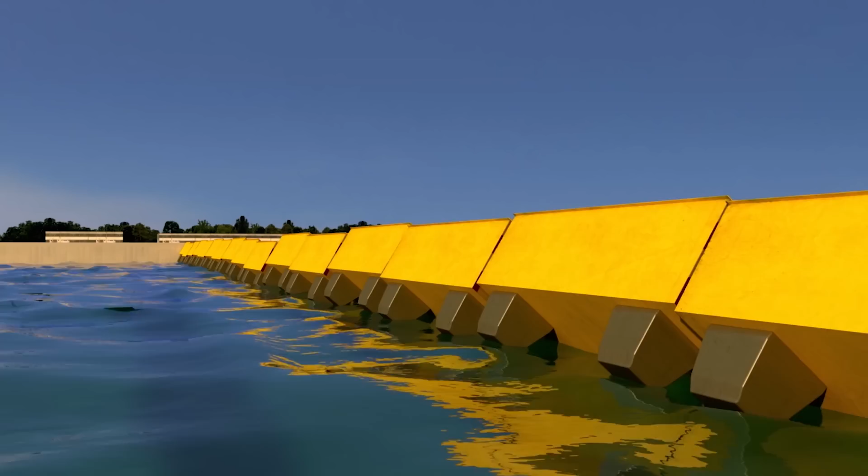For the last 30 years, engineers have planned one of the most ambitious moving dike projects in the world, dogged by indecision and scandal. Today, the MOSE, the mobile seawalls the city never needed in the past, are almost ready to be used.

A new day rises over the Venice lagoon.

The water in the lagoon is between just 4 and 14 meters deep. But when the 550 square kilometers of sea surface are whipped up by adverse winds and tides, the sea level can rise by up to 2 meters, flooding the city that was built on millions of wooden stakes that hold the hundreds of sandbanks and islands together.

The architectural treasure that is Venice is threatened by the very element that made it prosper in the past: water. Its position and wealth have been its ultimate downfall. With a dwindling population, the city is literally being broken down by tourism and climate change. But saving Venice has become a World Heritage priority, and billions are being spent to stop the rot.

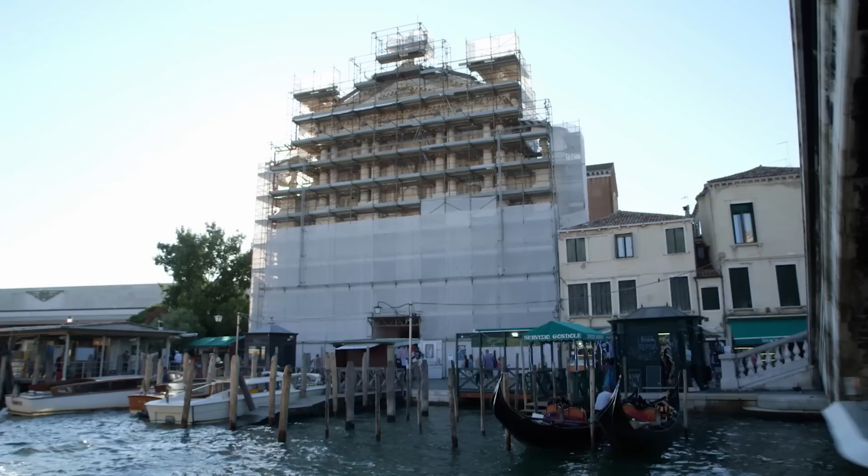The lagoon is an ecosystem in danger. Not only the city, but the hundreds of islands and wetlands that make up this unique landscape risk being lost forever, with the added complication of rising sea levels.

Bounded in the north by the river Sile and in the south by the Brenta, for centuries the Venetians fought a battle to stop the lagoon silting up, even deviating the course of inland rivers. Access to the sea was Venice's source of power, and the lagoon was its natural defense.

In the last 30 years, the situation has been reversed. Trade now goes to Marghera, the city that drained the water table, and the sea has become a threat.

The walls of Venice are the massive floating barriers that will stop the sea from flooding Venice.

Giovanni Zarotti is the lead engineer on the MOSE project. He has seen it grow over the years and now heads up the team that will bring it to fruition.

The new Venice consortium of Venetian enterprises has come together to build the MOSE, or Modulo Sperimentale Elettromeccanico, the floating walls that will defend Venice from high waters.

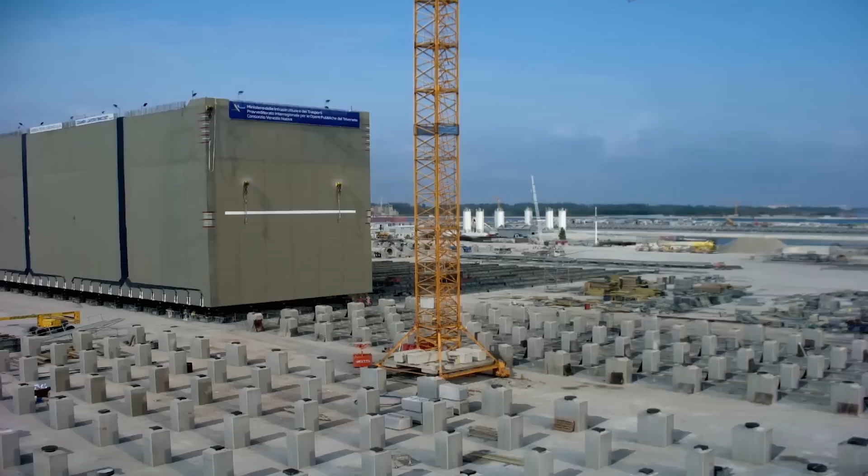Moving the massive engineering parts that make up the MOSE fell to one of the world's leading heavy lift companies, Fagioli. In 2012, the company was engaged by the new Venice consortium to lay the floating barriers and concrete housings that cross the Lido entrance to the lagoon. It was the beginning of the final phase of the MOSE project.

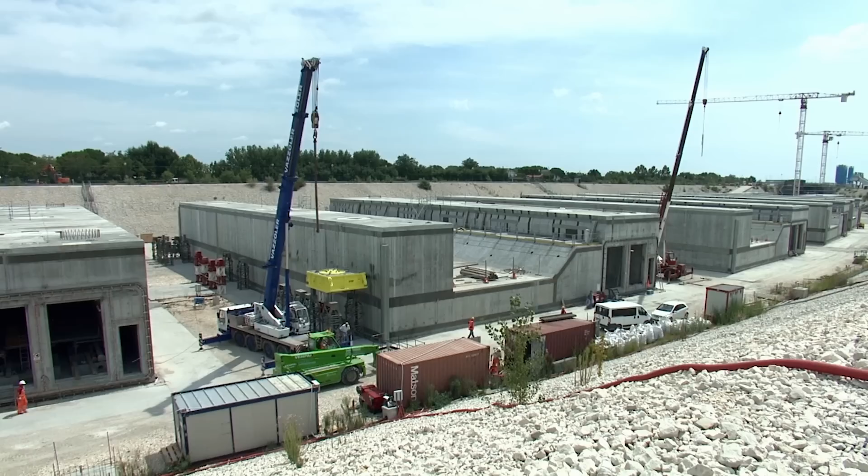However, the Malamocco and Chioggia entrances required extra engineering, as they are even deeper and wider than the Lido entrance. Fagioli's engineer, Tommaso Favaretto, was the lead engineer on the project.

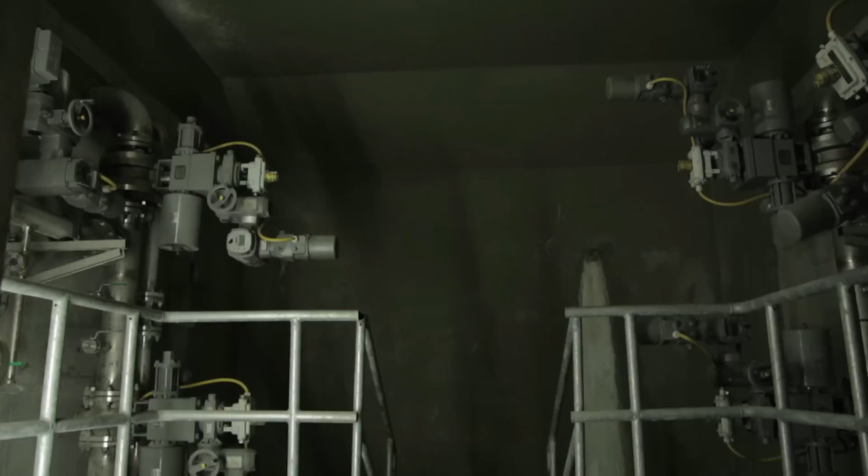The project was officially launched in 2003, and a lot of the work, most of which has already been finished, were works of civil engineering. So, for example, the concrete housings that form the base of the work and the housing for the walls, consolidation work, and the essential infrastructures that the whole project needs, located at the lagoon entrances.

The Venice lagoon is 80% made up of wetlands that are partially submerged, and only 12% is made up of islands, while the city of Venice is actually held together by millions of wooden piles pushed into the mud and sand.

The tides that so threaten the city are also its only real drainage system. Twice a day, clean water enters the canals and dirty water is taken away. As a result, there were several prerequisites for the MOSE that the designers undertook to respect, not only to maintain the overall visual aspect of the lagoon, but also to ensure free exchange of water between it and the open sea.

Access for ships and seawater into the Venice lagoon is through 3 openings in the long sandbank that makes up the barrier with the open sea. The openings are at the Lido of Venice, at the small fishing village of Malamocco, and in the south of the lagoon at Chioggia.

The MOSE concept is based on a system of floating barriers to close these 3 openings when adverse wind and sea conditions are forecast. They are massive steel walls that can be filled with compressed air when necessary, rising to the surface, making a floating wall.

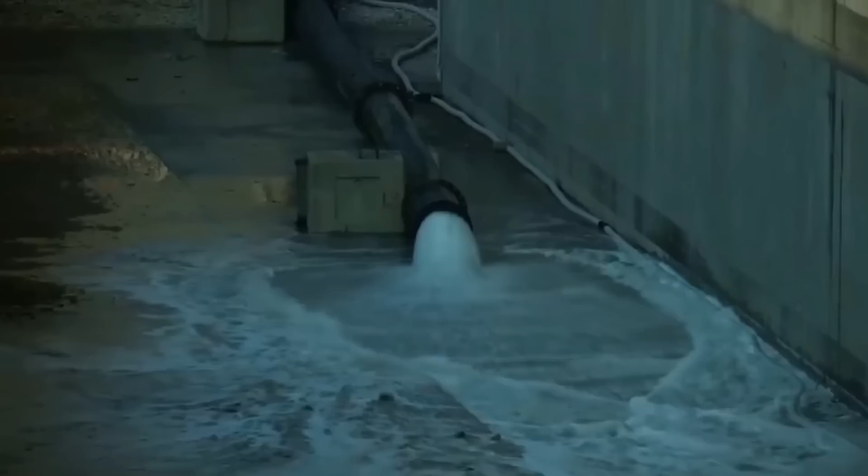In these extraordinary images, dating back to the first campaign to lay the caissons, the concrete housings for the barriers, we see the area where the housings were built being flooded. One by one, the caissons were pumped with air and floated.

Fagioli used a special catamaran to position each 12,000-ton concrete housing over the 12-meter deep trench dug into the sea floor, where 4 300-ton capacity strand jacks lowered it onto bags that were slowly emptied to provide the soft landing needed for absolute precision.

The exact location of each caisson was guaranteed using GPS positioning and radar. It was one of the most complex moves Fagioli had ever carried out.

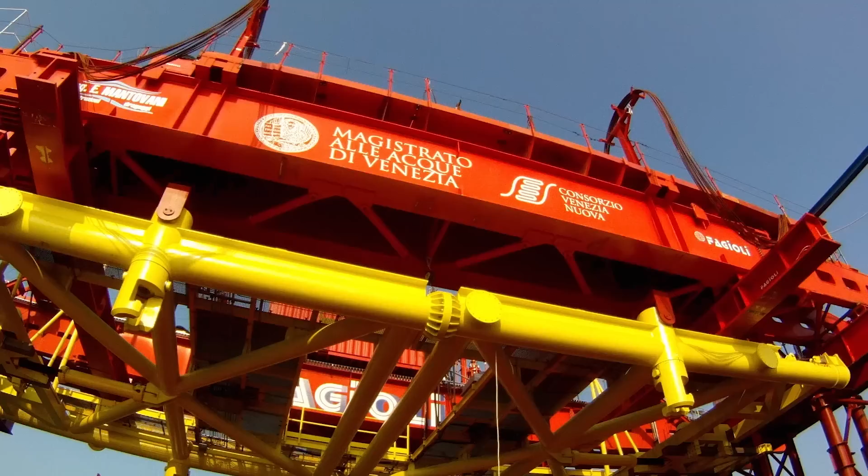Then the walls themselves were laid. They weighed 210 tons. They were floated out to the location above their concrete housings on a barge, and then lifted by a specially designed gantry crane and lowered into place so that they fit perfectly onto the hinges.

In a rare visit to the underwater bunkers, located more than a dozen meters under the surface of the lagoon, the actual configuration of the concrete housings for the mobile barriers can be seen. A tunnel with lifts at each end allows for regular inspection of the hydraulics and electric systems that are at the heart of the MOSE.

Each hinge is housed in its own room with watertight access doors. A reserve tunnel ensures there is access under all conditions, even when the bunker-like construction is flooded.

Malamocco is a pleasant fishing village on the strand that separates the Adriatic Sea from the Venice lagoon, and is also the place where hundreds of ships pass through every year to get to Porto Marghera, the great industrial and petrochemical hub of northern Italy.

The channel is particularly deep, and the caissons, or bunkers, were built close by as they were particularly heavy. While at Lido, each of the caissons is able to house 2 barriers, here each concrete underwater bunker houses 3.

At Malamocco, the system used was different, although the housings were essentially the same. They were built on a bank above sea level and then moved via a system of rollers and taken to the synchrolift, a kind of massive elevator that lowered them into the sea, and then they were floated away and tugged to their final destination, and then sunk again.

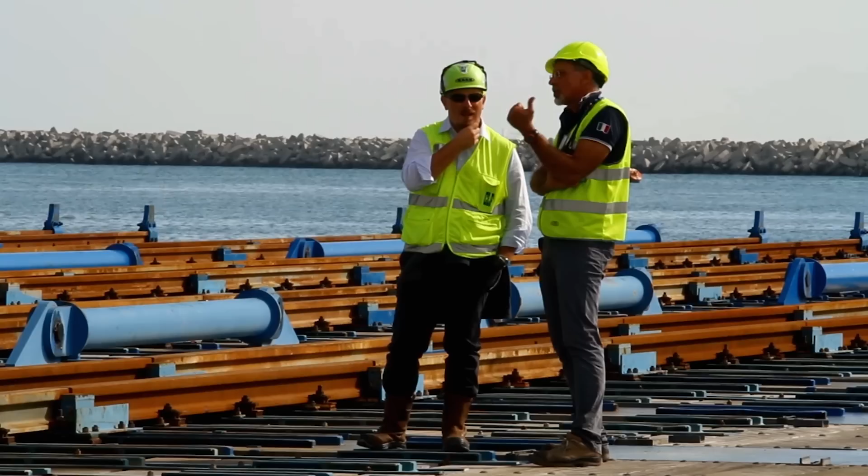Building such a huge work of civil engineering was easier said than done. The concrete structures built at Malamocco first had to be lifted and then moved onto the huge synchrolift crane.

Then they were lowered into the water to be tugged out to the open sea and dragged to the place where they were to be sunk. The sea floor had to be specially prepared to house them, so that their roofs were flush with the natural depth of the sea in those locations. Then they had to be emptied to allow access for workers to prepare the electrical wiring and compressed air pipes that activate the enormous floating walls.

The size of the housings varies from one lagoon entry to another, but the largest are 60 meters long, 40 meters wide, and 12 meters high, and the whole of the height has been encased level with the seafloor. Weights differ too, but we are in the area of 22,000 tons of concrete.

The barriers have a very important element, the hinge that allows them to rotate and also receive all the surface piping that carries air, making them rotate and float. So there are corridors that allow workers to run through the housings.

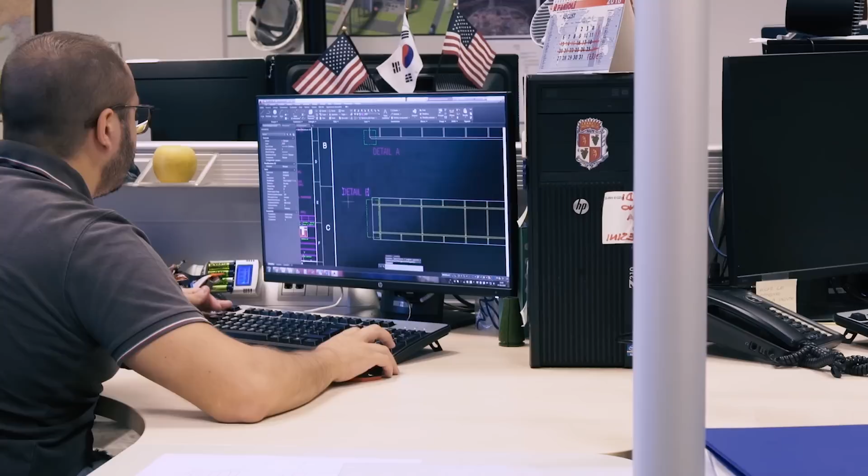Here at the Fagioli headquarters near Reggio Emilia in northern Italy, engineers are working on the technical specifications of a gantry crane that is soon to be handed over to the New Venice Consortium to allow the regular maintenance of the floating barriers that have become Venice's new walls.

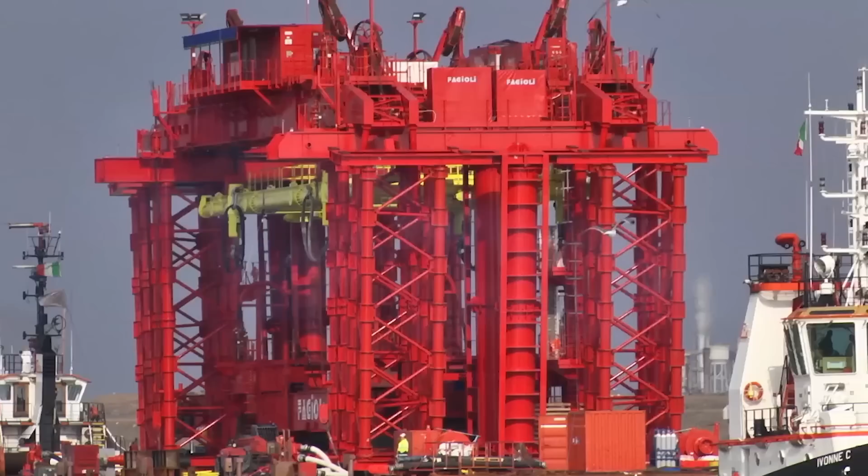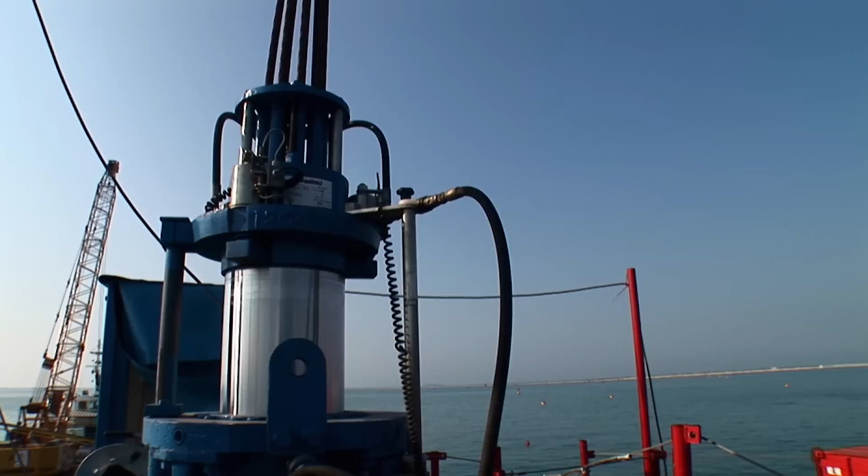A strand jack is a hollow hydraulic cylinder with a set of steel cables, the strands, passing through the open center, each one passing through 2 clamps, one mounted to either end of the cylinder. The jack operates like a caterpillar's walk, climbing or descending along the strands by releasing the clamp at one end, expanding the cylinder, clamping there, releasing the trailing end, contracting and clamping the trailing end before starting over again. The real significance of this device lies in its facility for precision control.

When many strand jacks are activated at the same time under the control of a central computer system, the lifting power of each individual steel strand can be multiplied infinitely. Fagioli famously supplied the near 100 strand jacks that rolled the Costa Concordia onto the artificial sea floor so that it could be readied for refloat.

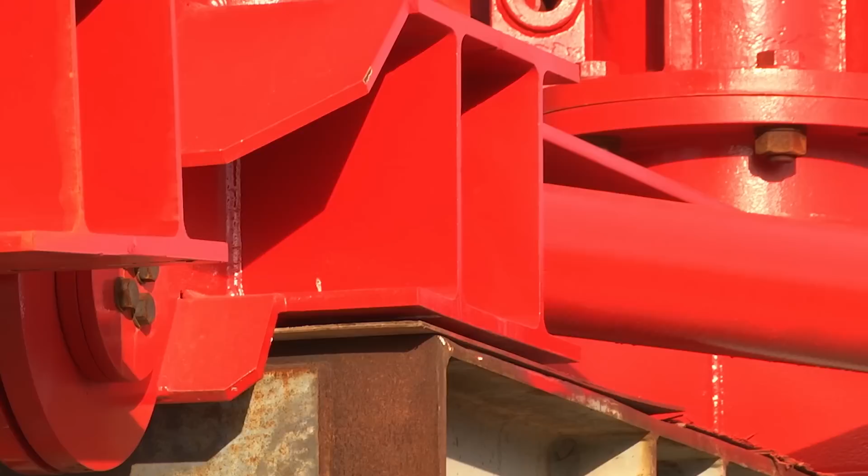The logistics of getting the gantry crane to Venice were so difficult that the company decided to build it directly close by. All the parts were manufactured and delivered to a construction site at Porto Marghera.

The gantry crane is assembled and built at a site near the place of operation, but not on it. The place was ex-Area Pagnan.

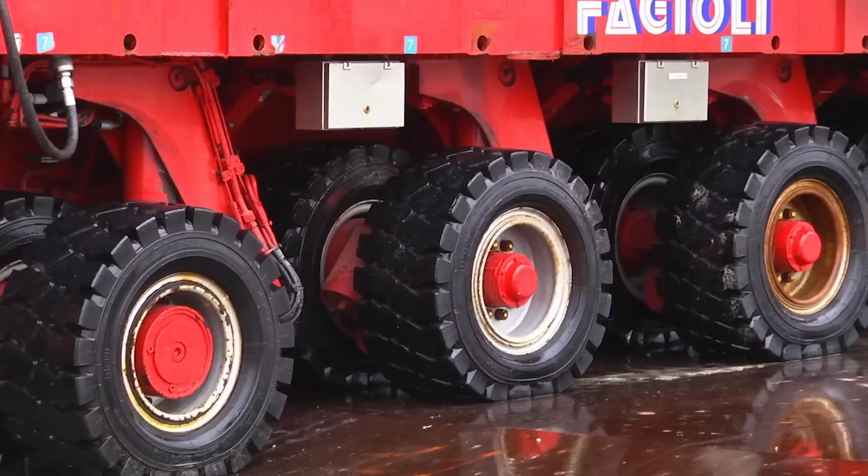Getting the gantry crane onto the barge was a specially difficult task. Luckily, Fagioli also owns hundreds of SPMTs, self-propelled modular transporters, that not only are modular, so can be as long or as short as needed, but can also lift their loads.

Fagioli uses SPMTs in all their heavy lift operations. SPMTs are modular, wheeled flatbed vehicles that are remotely driven and maneuvered. They are able to move in any direction and even rotate, as each set of wheels is independent. They can be as long or as short as the user wants, as well as hydraulically raising their load.

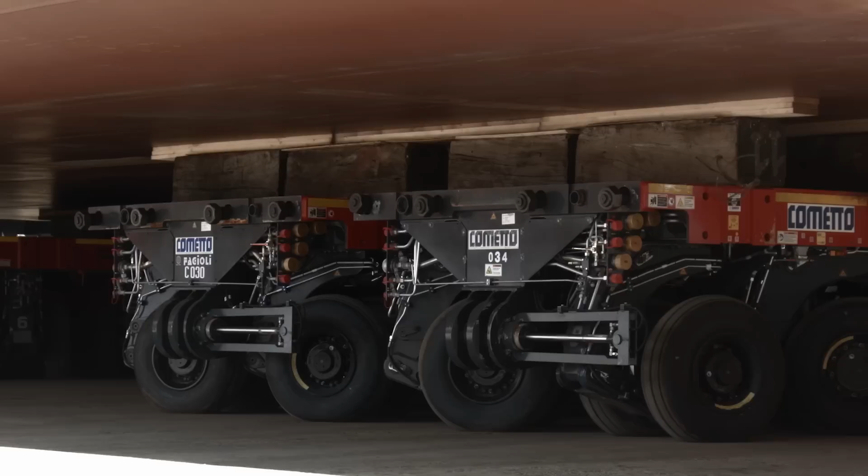They are seen here moving the whole center section of a ship that has been lengthened by slipping this new segment into the middle. The versatility of the SPMTs is shown by how the wheels swivel 90 degrees to move the load perpendicularly to the original direction of transport.

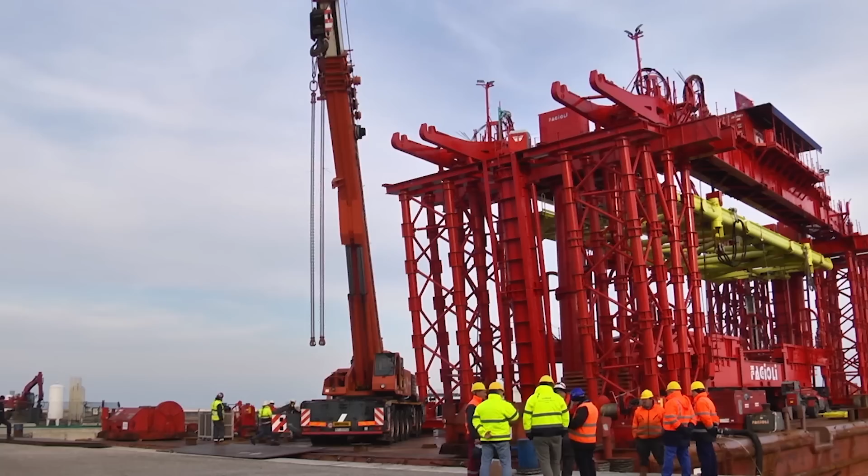Once we reached the worksite, the crane was disembarked and turned 90 degrees into the installation position. Then it was re-embarked in the installation position and then taken to the point above the concrete housing where the first barrier, or the barrier in question, was to be lowered and then set up.

The barge made its way to the pre-established site over the caisson hinge where the floating barrier was to be placed. It was then held in place by cables attached to posts, and the barge pilot's job was now to keep it stably in the same place, using a joystick that pulled on the cables to counter any current or wind.

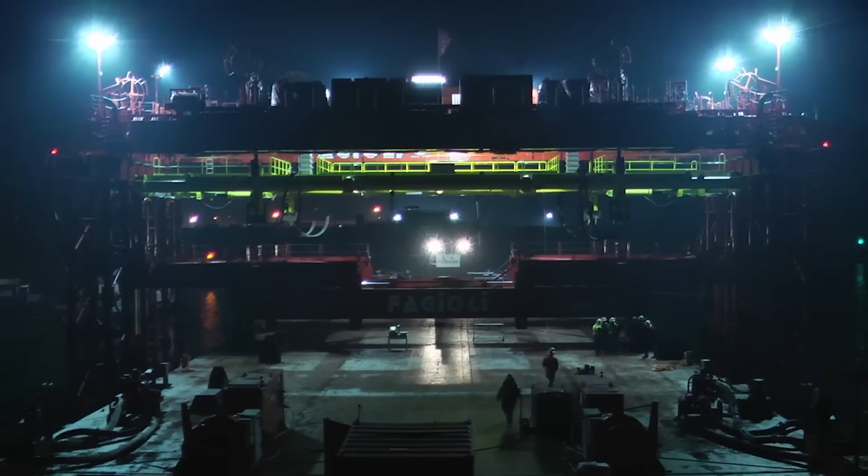The strand jacks pulled open the legs, which were then locked to provide maximum stability. The lifting device lowered the gantry crane onto the surface of the caisson.

The gantry crane was equipped with a centering cone located in the base of the frame, which is a male part that's wedged into the receptacle on the surface of the concrete housing. Once in position, the gantry crane is lowered until the male cone, on the foot of the crane, enters into the receiving cone located on the housing surface.

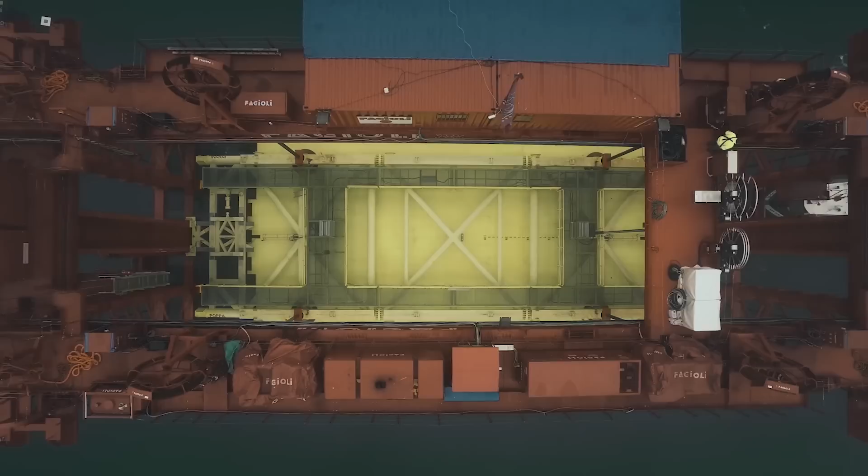So the barrier is attached to the fishing beam that's attached to the gantry crane via strand jacks that allow vertical movement. The fishing beam is equipped with hydraulic systems that push against the gantry crane to allow for horizontal movement, so we get millimetric positioning both vertically and horizontally.

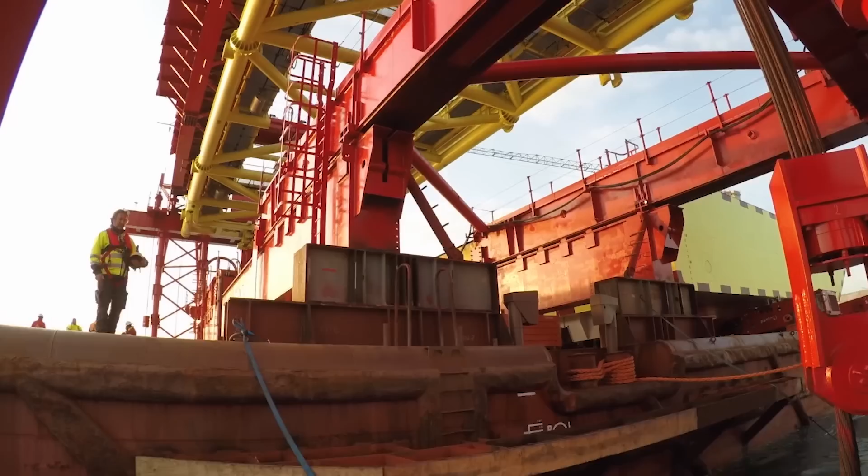However, the whole operation involved laying floating barriers in as little time as possible. So as soon as the first was fixed in place, the transportation beam was brought out on the barge, and once again the gantry crane was lifted out of the water. The strand jacks pulled up the legs, and once again the barge was tugged to the next position.

Laying the MOSE floating barriers took months, in every kind of weather that the Venice lagoon could throw at the equipment and the men.

In all, there are 78 barriers, but more were actually built because there are 2 spare barriers for every lagoon entry. The reason for this is that these barriers will have a periodic need for maintenance. So, in order not to leave the place where the barrier has been removed without protection while it is being repaired, the extra and identical barrier is positioned there as soon as the barrier due for maintenance is removed.

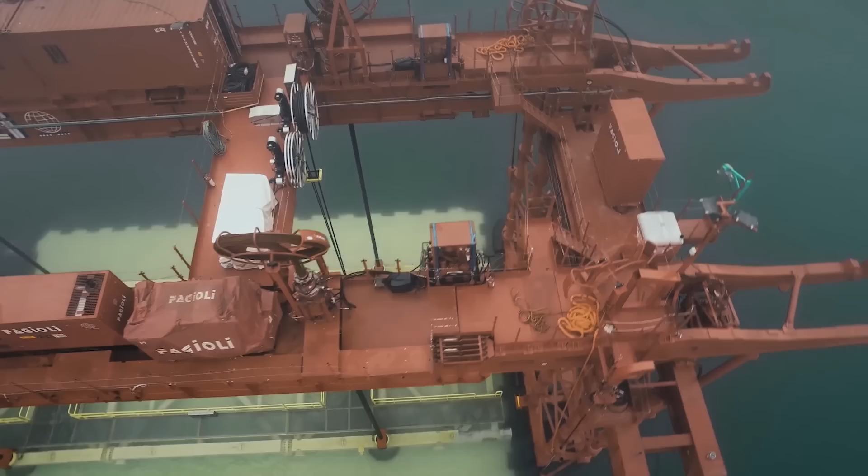As the seasons came and went, the floating barriers of Chioggia and Malamocco were securely laid, and the great civil engineering project approached completion. The next steps involved testing it.

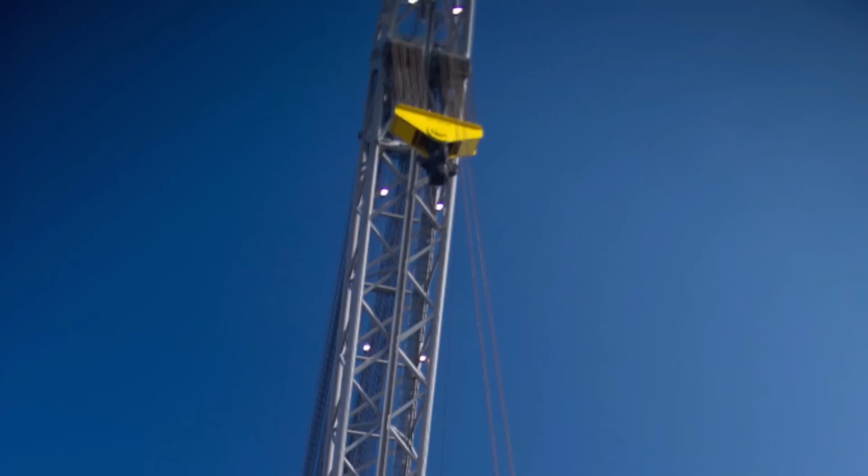A giant of the sea roams the ocean, a huge ship with a massive crane. This is the Oleg Strashnov, one of the biggest monohull crane ships in the world. Its mighty boom is able to lift up 5,000 tons of weight. It is not only a huge crane, but also an efficient multitasker, integrated into a ship system that stays stable in the water, whatever the weight, whatever the elevation. This is a true marine monster, a legend of the sea.

The sun rises over the Dutch port of Schiedam, located on the busiest waterway of the country, west of Rotterdam and close to the open North Sea. This is where a hub of nautical companies provides the most advanced engineering support for the whole of the maritime industry.

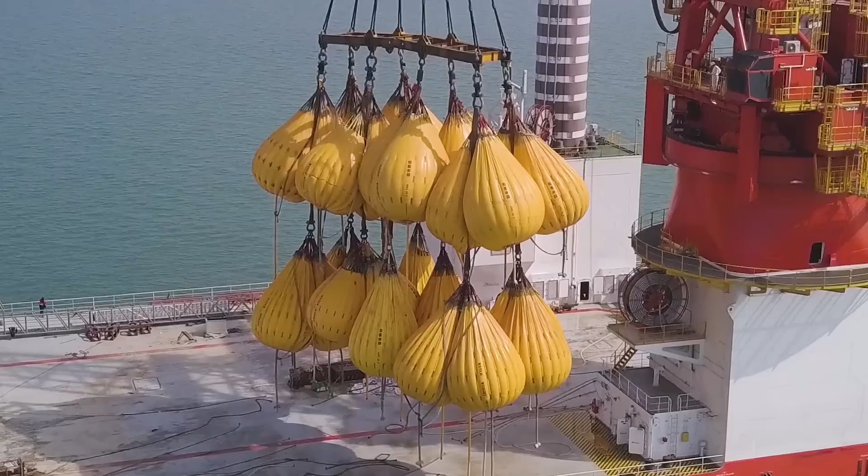The name of Gusto MSC is intimately tied to the world of shipborne cranes, machines that have played a fundamental role in the offshore energy industry for decades - little-known machines that have been strategic for the growth of first the oil and then the wind farm businesses.

Gusto MSC's clients are companies that, amongst other things, require heavy lift capacity offshore. The cranes that the company has designed are integrated into ships, jackups, and rigs that not only navigate the seas but also have the necessary stability to withstand environmental forces and perform their heavy lifting tasks.

Arjo van Putten is the chief engineer of the crane department at Gusto MSC. He has honed his skills designing massive cranes of all types, including the huge 5,000-ton crane of the Oleg Strashnov installation ship. Lifting capacity is one of the most important things.

And the outreach - in fact the combination. So for example, if it is 5,000 tons at 30 meters or 40 meters, that's really a big difference. Once we know that, then it is important also to know the lifting height. Especially nowadays for wind turbine installation cranes, the required lifting height increases quite a lot.

So that's also an important factor, and it can have an impact on the complete design of what we are going to use. Alain Vassink is the marine architect who designed the Oleg Strashnov and is now sales director for the Gusto MSC cranes. Gusto MSC is a design and engineering firm, and we specialize in design of mobile offshore units of all sorts and types, from jackups to semis to ships.

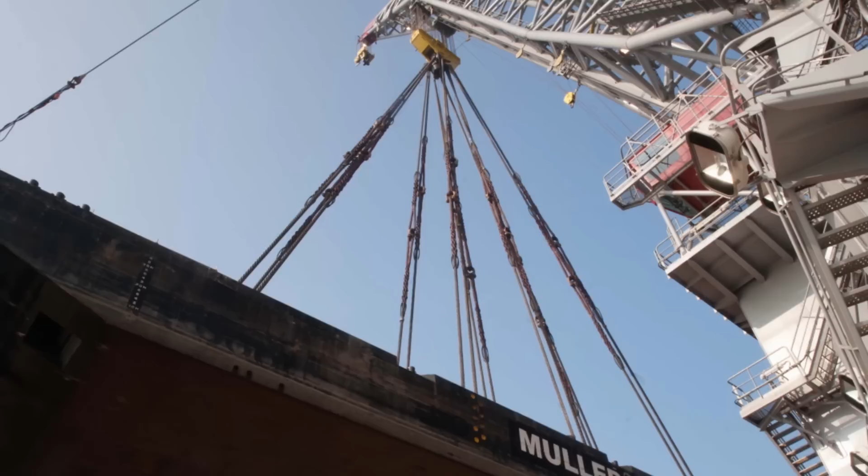The massive crane that Alain and Arjo have built is the result of 7 years of hard work, first designing and then building and testing the ship and crane. It was in the spring of 2007 that we got the order for the delivery of the crane.

Then we spent about a year on the whole design. And then of course already we start purchasing materials because there are some long lead items. Especially at that time the market was booming, so delivery times increased quite fast. So we ordered all the long lead items as soon as possible.

Then the eventual delivery was almost 4 years after the original order. We started out in 2005 with the owner, Seaway Heavy Lifting, to come up with a concept for a fast crane vessel. Most vessels are quite slow, 4 to 6 knots at that time. This was a fast crane vessel, versatile, with the then highest lifting capacity for a monohull in the world. They wanted a design that could sail fast and be very stable when doing lifting operations, which is usually a contradiction. Gusto MSC actually builds the cranes itself, ordering the parts from outside, while the company provides ship designs to third parties who construct the ship.

The two key elements of the integrated ship and crane system grew by the day until the ship was ready for launch. It was the 22nd of August, 2009. I've been involved since the inception of the ship. Seeing it enter the water was quite an exciting moment. For me as a naval architect, that's the birth of the ship.

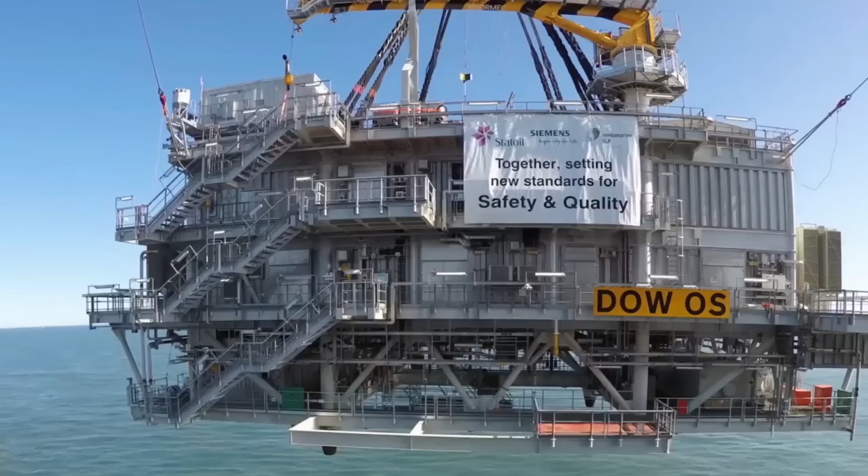Oleg Strashnov is one of the largest monohull crane ships in the world, and the original owners had some specific and very ambitious requirements for the ship. Indeed, it was and remains a revolutionary ship in many ways. It is one of the fastest of its class. It has one of the largest cranes, and above all, it offers an amazing amount of versatility. It is truly a marine monster to be respected.

So the ship came out at a little over 180 meters in length, with two beams, of course. We have 37.8 meters on the low draft, and we've got 47 meters on the deep draft. To make this happen, you need quite a high ship, because you have to still have some freeboard when you're in your deep draft. So you're at around 18.2 meters in depth of the hull, with ultimately a displacement of around 70,000 tons at the deep draft.

The marine architects of Gusto MSC accepted the challenge to design a ship that was highly unconventional, but also highly competitive in terms of speed and fuel consumption. The design criteria for the Oleg Strashnov included the ability to work on site, while the ship also provided a stable base for the massive crane with its unique revolving main hook with a 5,000-ton lifting capacity. Designing such a ship, maintaining balance when the crane arm is fully extended, was a challenge.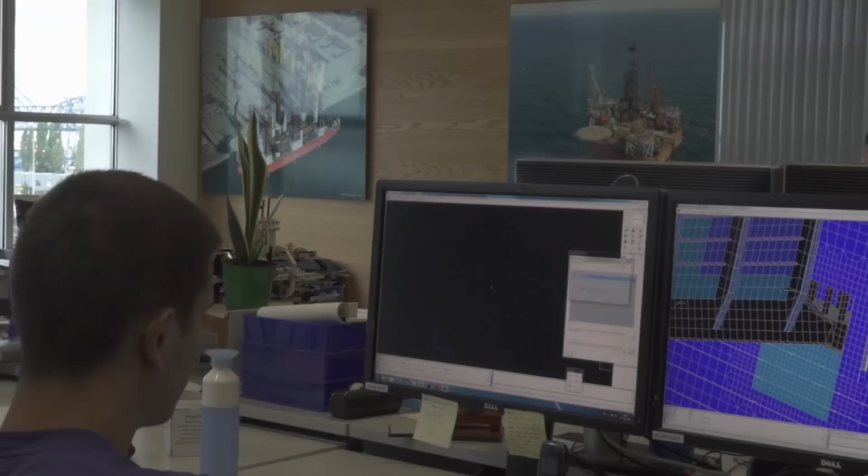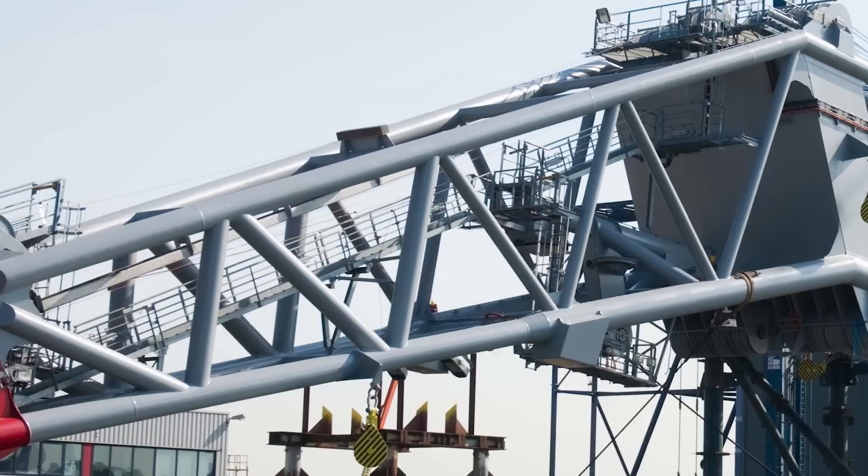The boom chords, for example, the big tubes, are made from 690 material, that's steel with a strength of 690 megapascal. Other parts like in the A-frame, the backside, mostly parts in tension, are made out of the 690 yield material. But the braces, which are welded, the tubes in between the big chords, are made of 355 yield material, because they are not governed by the stress in the material, but by vortex shedding.

However, most of the crane's work is done with small loads, and this is where the supplementary lifting machines come into play.

A special thing about this crane is that normally when the crane is rotating with an empty hook, with the boom at about 60 degrees angle, the center of gravity is exactly in the middle. That was one of the design criteria. There is a removable ballast system at the backside of the crane, and by doing this, most of the operations are actually small loads. So the lifting capacity is 5,000 tons, but more than 90% of the lifts are less than 100 tons. During all those operations, the boom is at approximately 60 degrees, and it can rotate without having to ballast, because the center of gravity is in the slewing center.

The industry sets standards, but these cranes are so huge that extra safety measures have to be introduced to make sure nothing, absolutely nothing, goes wrong.

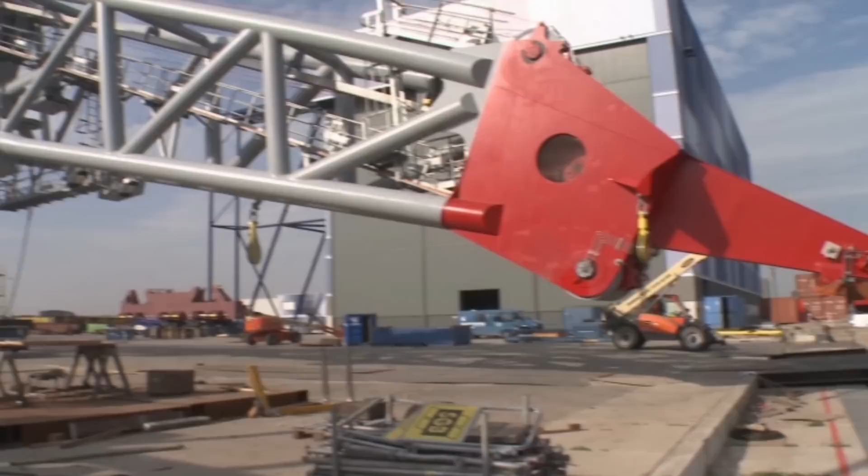There are several main component parts of a crane: the boom, the long arm that extends out to sea to lift heavy loads, and of course the A-frame that controls the extension of the boom, lifting and lowering it as necessary, and through which the lifting cables pass.

There is also the ring platform around which the crane swivels, and the motor that provides the power both for moving the crane and turning the winches that pull the loads up or down. On Oleg Strashnov, all these components are massive.

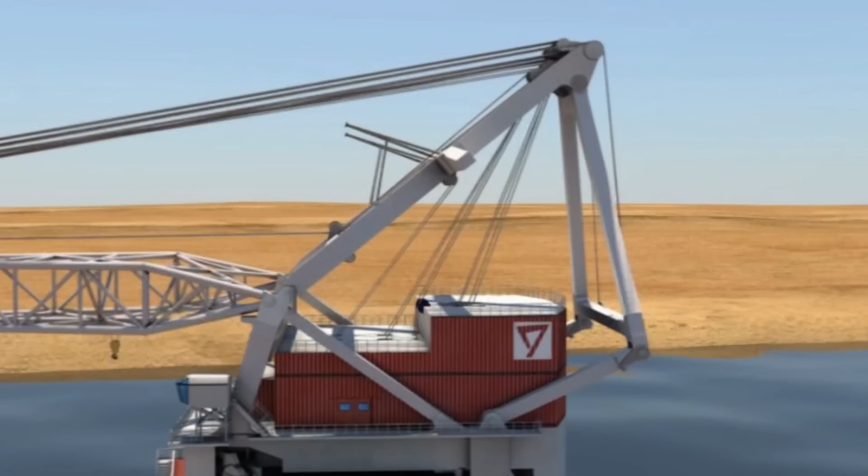Oleg Strashnov's A-frame is also special, as the client required the ship to pass under the world's bridges, such as the Bosphorus Bridge that joins Europe with Asia, so as to engage in offshore heavy lift in the Black Sea, one of the world's most strategic areas for energy resources.

We added an extra hinge at the aft side of the A-frame, at the back leg, which is a vertical leg. Normally that leg is in tension, but during transit of the vessel there can be a vertical load downwards as well, and then it's in compression. What we did is we created an extra hinge, which is normally locked by a small beam.

When we want to lower it, first the boom is lowered into the boom rest, and if we keep on rotating with the boom hoist winch, then the rope tension is lowered, and eventually the A-frame should go backwards, but you have to help it a bit. So what we did is there is a locking system, and when you unlock it, there is a hydraulic cylinder, and it gives us what we say a kick in the knee, so it starts to bend, and then on its own weight, it has to go backward.

Once these major design features were established and construction completed, the actual assembly of the massive crane began. This in itself was a mega-lift operation.

The motor housing was built in China and delivered to the Schiedam docks, where it was to be integrated with the ship. Here it was lifted onto a massive barge and lifted by two shear legs to be transported to Oleg Strashnov.

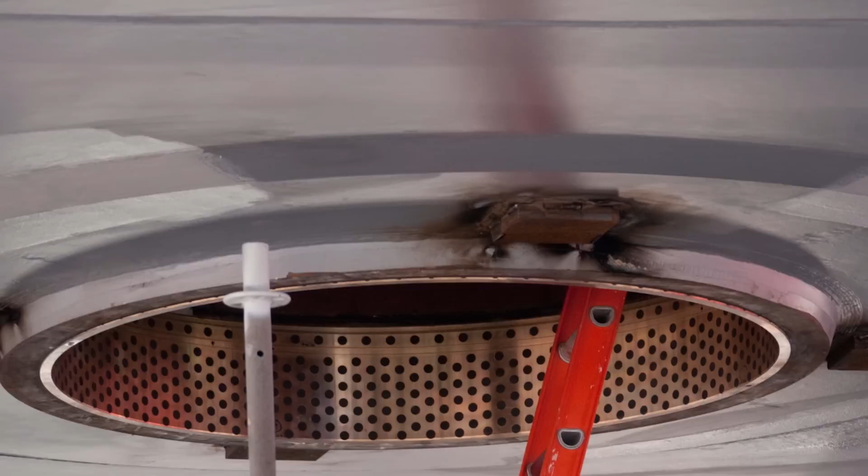The motor housing had to be positioned with millimetric precision, and only the expert eyes of the designers and construction workers could guide it properly into place. It was placed delicately on the base and the pin.

The bogies followed and were fitted perfectly on the rails, allowing smooth rotation of the crane.

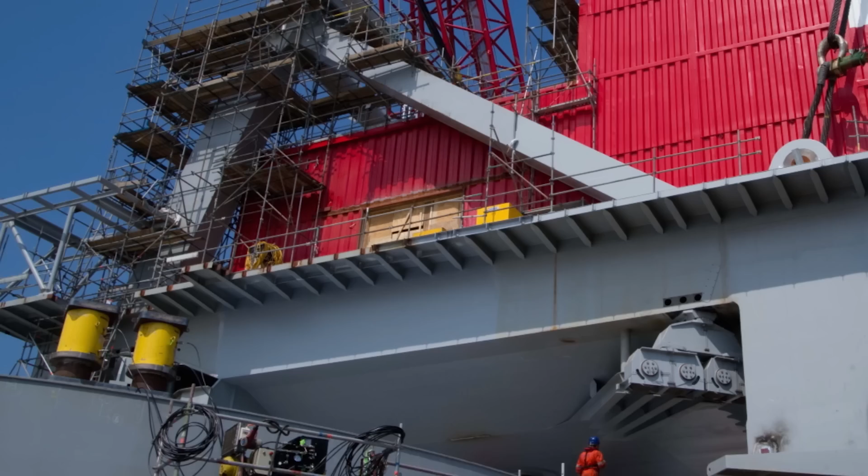Then the A-frame had to be fitted. Not only the static part had to be precisely connected with the crane base, but the folding segment had to be lowered so that the massive pins that allowed it to be collapsed to reduce height could be inserted accurately. This in itself was a mammoth task, and yet there was much work still to be done.

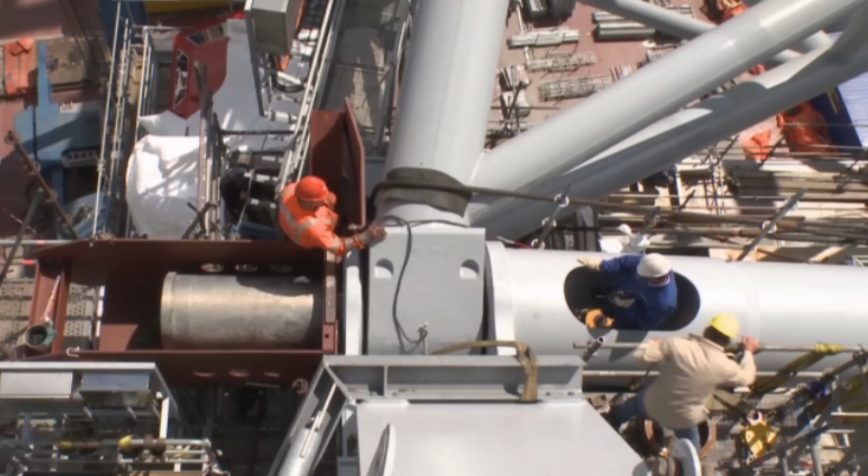The largest single element of the crane was now ready to be moved. The heavy lift company, Sarens of Rotterdam, moved the boom onto a barge using self-propelled modular transporters, or SPMTs, from which a massive shear leg was able to lift the 100-meter-long steel trellis structure onto the huge hinges that awaited it on the crane body. This was the crucial moment of the assembly of the whole Oleg Strashnov crane ship.

This was followed by lifting the ballast for the crane, the counterweights that are brought into play every time the boom lifts a weight at the fullest extension.

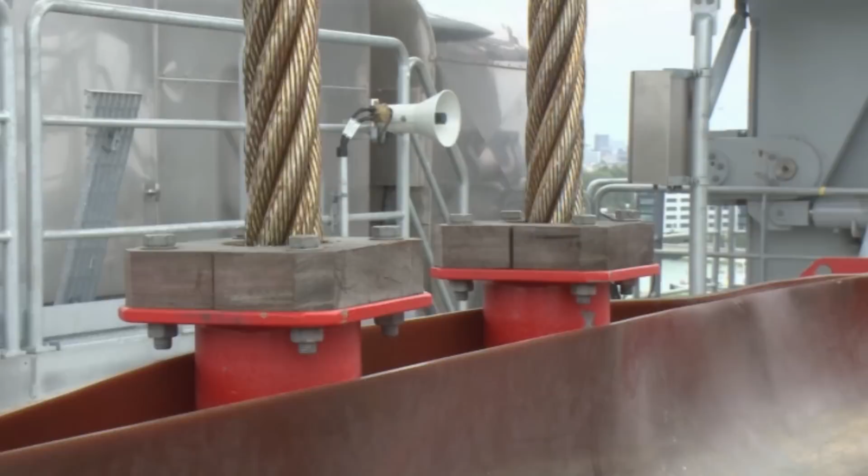The next stage involved the reeling of the cables and ropes. Dozens of steel cables were pulled through the boom guides and then meticulously wrapped around the winches. The closer to the core of the winch, the less cable is released, so the automatic gears are key to keeping lifting speed uniform. The 64-millimeter cables had to be guided by special ropes through the boom all the way to their winches, one by one, and wound on accurately, securely. This is the heart of the whole crane, where the lifting actually takes place.

From the client we receive certain lifting speeds. They specify a lifting speed, an average speed, because if you have the winch, there are several layers of steel wire rope on the winch. So the rope speed is different when you are at the 10th layer or the first layer. They specify an average speed, so that's where we are working with. We calculate the required power.

Now that the crane had been constructed and installed on Oleg Strashnov, the next crucial stage could begin. Oleg Strashnov is the largest monohull crane ship in the world and flaunts three very special characteristics that other ships of the same type do not enjoy. It's fast, its crane can lift 5,000 tons, and it is incredibly versatile.

On the 11th of March 2011, the ship was ready to be tested. The crane capacity was the first requirement that had to be tested. The trolley crane was put to the test. This was done by filling balloon-shaped containers with seawater and simply lifting. Once these tests had been completed successfully, the onboard computer system could be calibrated, providing accurate load readings.

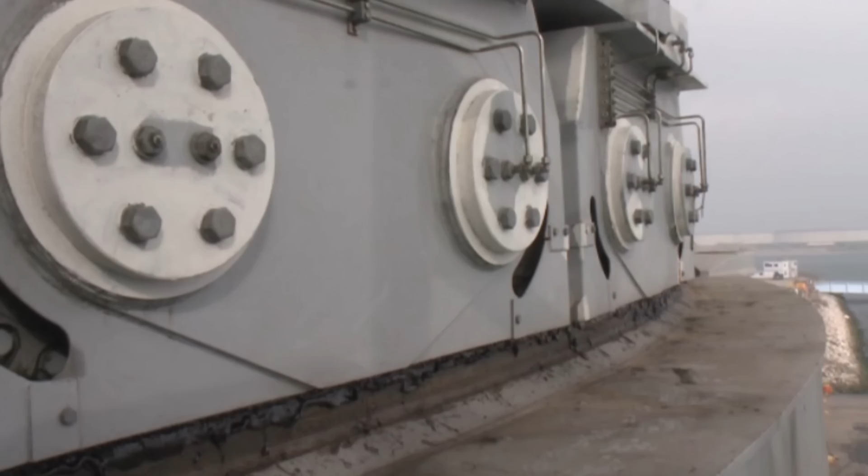So let's take a tour of the Oleg Strashnov as it is today. These photographs allow us to see the inner workings of the offshore workhorse. This is the view from the crane driver's seat. The whole length of the ship is now visible, with the hundreds of pieces of auxiliary equipment on it.

From the crane side, you have lifting tools, all kinds of tools that you use to actually pick up the load, rotate the load, control the load, to put it into place. Once you put, for instance, the monopile for a wind turbine on the seabed, you need to keep it in place, otherwise it falls over. So there's a gripper that keeps it in place. Then you need a big hammer that is actually lifted on, and that's also a couple of hundred tons, the hammer alone. And that is all the equipment for the lifting operation itself.

Then for the positioning, you need the ROVs, so the remote-controlled robots underwater. Saturation diving is still used. It's amazing how much equipment fills up the deck when you do such an operation. The main hook was specially forged as a single block just for this crane.

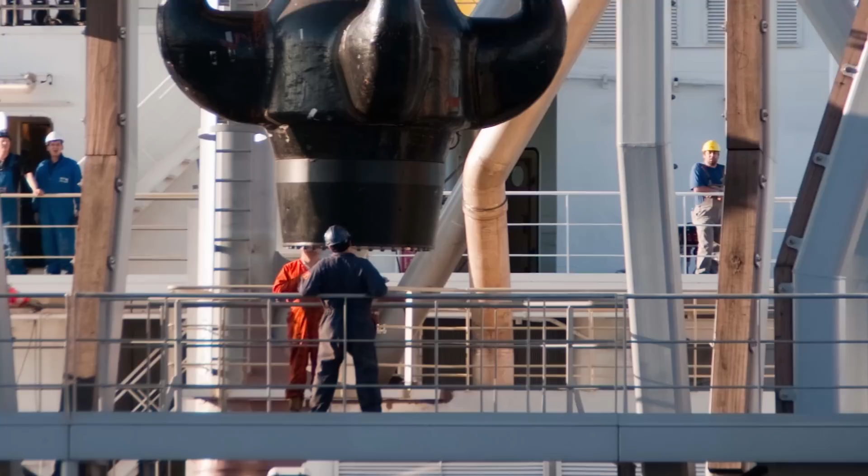The crane is electric powered, so it receives power from the vessel. The vessel has generators, and we receive 6.6 kilovolts from the vessel. It's about 6,500 kilowatts is the power that we maximum consume. In the crane, at the backside, there's 3 levels of electrical equipment, and there it is transformed to 690 volts. We have rectifiers, they make from the AC, they make DC. And then we have drives who convert that power to the motors at a certain frequency and speed.

Special safety features ensure that accidents with the winches are practically impossible, including clamps on the cables, sensors that stop the hooks from impacting the top of the crane. The crane is also designed to be able to operate in harsher weather conditions than its competitors.

When the hook is hoisted towards the boom, we always know the exact height of the hook, and when it's coming close to the boom, there is a warning. When it comes a bit higher, it automatically stops and there is an alarm. And when there is the warning, it already goes to a lower speed.

When there is a situation that the crane operator wants to go even higher than that, he can overrule that, and there is another safety switch at the boom which stops that motion, and that cannot be overruled anymore. And that's the whole crane. Everything is safeguarded by at least two systems. If one fails, then the other one still is there as a backup.

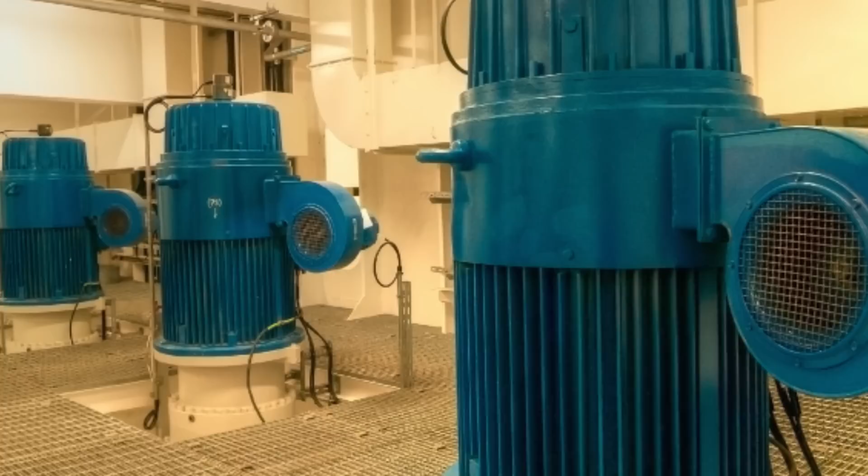The boom and hook are not the only areas of the ship that can go wrong. There is a double braking system on the cables and winches too that can hold loads in place if there is a danger, or even lower them slowly if power is lost.

These winches have a double brake system. You have a system on the drum itself. That's for a holding brake and for emergency. And there is also a brake at the gearbox. So there is the motor that transfers the load to a gearbox, and so that's the high speed. And then one of the intermediate shafts is used to mount the brake.

There was a bit of a special request in this case, because we also needed to do emergency lowering on those brakes. So in case there is no power available, we need to be able to lower the load with the brakes.

Oleg Strashnov has a class 3 dynamic positioning system, which means that it can stay in location with movable thrusters, but it can stay in location even after a fire in one of the engine rooms. So it's got redundant engine rooms, redundant thruster rooms.

A total installed power of 27 megawatt is needed, divided over 6 generators, with a 6.6 kilovolt high voltage distribution system, which is top end for this type of vessel.

Keeping the ship stable and perfectly positioned to accurately lay the foundations of oil rigs or wind turbines in extreme weather conditions is an essential requirement for a supply ship like Oleg Strashnov.

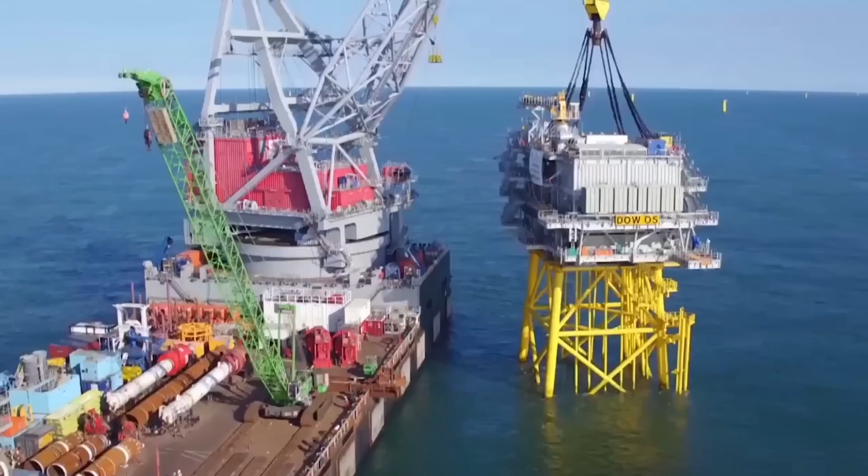The same is true for crane movement, as every change in the ship's center of gravity has to be compensated for. When we do have a big load, the vessel needs to ballast. So there is a ballasting system, and it pumps a lot of water from one side to the other side.

For example, when we do a test load with 5,500 tons, to make one revolution, we do it very, very slowly, because the crane can do it in 3 minutes, but the vessel needs to pump a lot of water to the other side all the time. So one revolution takes then about 1 hour instead of 3 minutes.

The ballast system on the crane vessel is one of the key systems that you have on board, because you have to keep the ship upright and you have to compensate for the crane. So the crane is revolving and the ballast system has to compensate for all the loads that act on the hull, and it's a ship, so it moves. And in this case, with this kind of crane, with a large outreach, you need a lot of ballast capacity.

So the ship has around 50,000 cubic meters of ballast capacity, and it has a pumping capacity of 20,000 cubic meters per hour.

The true power of the crane lies in the motors that power the winches. They are 6,000 kilowatt engines and have redundant backup systems just in case they fail and a heavy load has to be brought down gently.

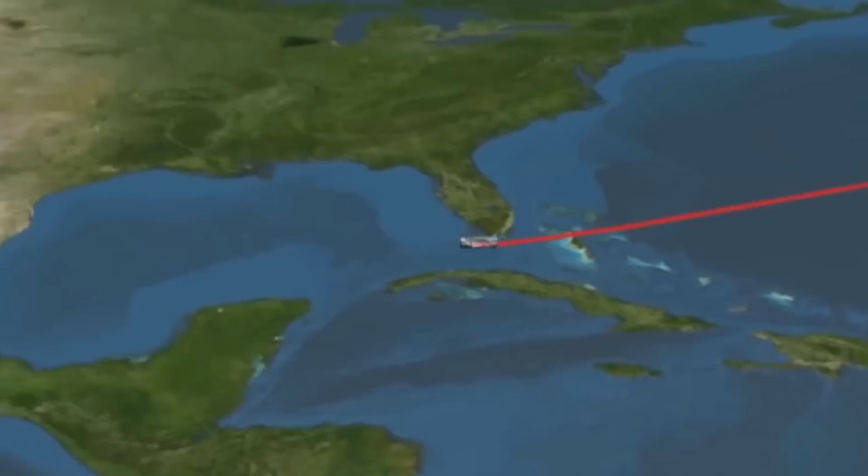At last, Oleg Strashnov was ready for operations. Its extreme versatility allows the ship to perform all the operations involved in building an oil rig or a wind farm. This animation shows the phases of laying the foundations of a wind farm control center: first lifting the foundations and positioning them on the sea floor, and then moving the structure itself, using the 2 hooks on the crane to right the steel structure and position it onto the foundations.

The really heavy lift comes with the upper platform, a monoblock of drilling and living areas, all less than 5,000 tons. The ship's versatility allows it to carry out many operations, and this in turn reduces time on site, generating significant savings for oil companies and wind farm builders.

A whole new source of energy is developing all around the world, and this ship has the ability to supply the wind turbine market optimally. Offshore wind farms maximize efficiency and can be bigger than those built on land. The size of the individual wind turbines that must be installed on the seabed is also growing.

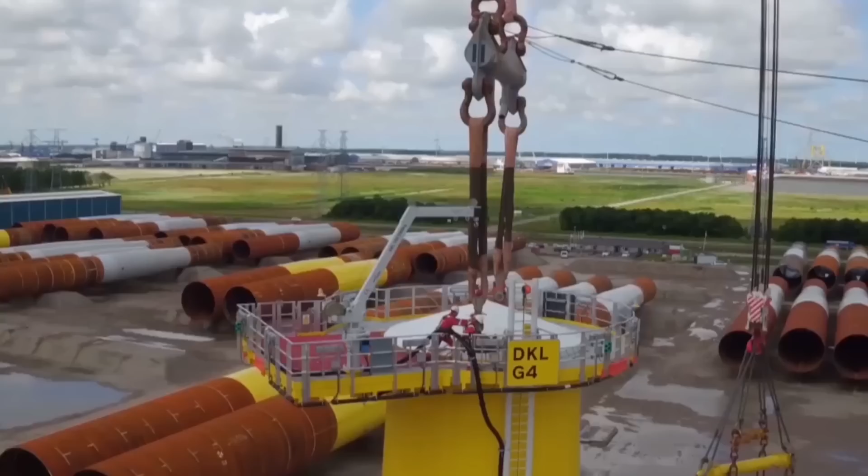In these images, we see the phases of wind turbine construction and how the massive 5,000-ton crane is suited to the task. The ship is able to lay both the foundation and the mast, and then the turbine itself, all in sequence.

When we designed Oleg Strashnov, we were looking at offshore oil and gas, and then you do a heavy lift, and that is one project, one heavy lift. In offshore wind, every day you do a heavy lift. It's like an industrial process, and that means you have to be highly efficient in doing the lifts. Oleg Strashnov is one of the vessels that have been very efficient in that.

That is mainly, of course, the operator, Seaway Heavy Lifting, that has been doing that, but we are a bit proud of that ourselves as well. The Oleg Strashnov sails off onto another assignment as the offices of Gusto MSC and the port of Schiedam are closed for the night. There is no shortage of work for these new versatile crane ships. The future for seaborne heavy lift has never looked brighter.

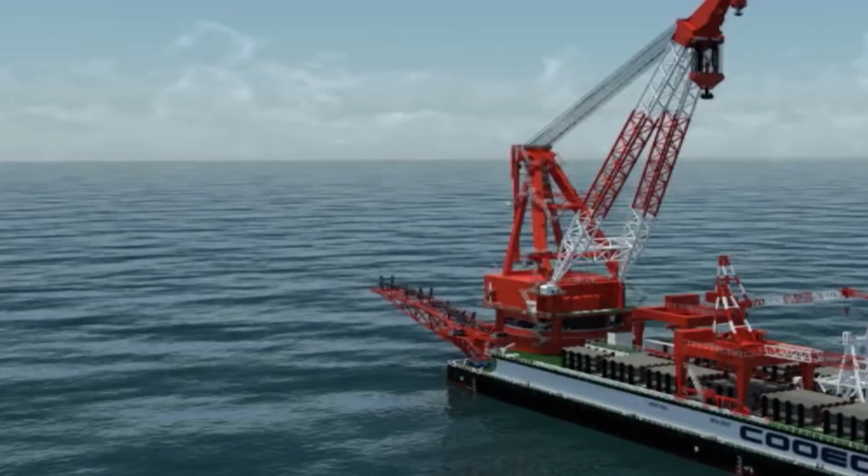Another day at the port of Schiedam, Netherlands, the heartland of the nautical industry, a hub for nautical services worldwide. This is where Gusto MSC enables and supports safe and efficient operations at sea. The Oleg Strashnov crane ship has inspired other vessels, including the Hai Yang Shi You 201, which was built in China based on Gusto MSC design, and also mounts a 4,000 metric ton capacity crane and a pipe laying system able to lay rigid pipelines in 2,000 meters of water.

In the energy business, mono-hull ships are not the only solution, however. So the company has designed several jack-up rigs that are more stable than ships when working at sea.

There's a clear difference in foundation installation and turbine installation, where especially the foundations are getting bigger and heavier, but they can be installed by ships, which can be easier built with larger cranes, while a jack-up is more stable, with less movement especially, and is very well suited for turbine installation because of the fragile parts.

When we delivered the vessels and the cranes for wind turbine installation, the size of the wind turbines was 3.5 megawatt till 5 megawatt. At the moment it's 8 till 9.5 megawatt, and the expectation is that will grow in the first, let's say, 5 years until 15 megawatt, and beyond that probably even to 20 megawatt.

So there is more or less no crane capacity available in the world to install that. Rather than just design another very big crane, we looked at how can we make a smart solution that also better fits the jack-up, because otherwise the boom starts to stick out 30, 40 meters, which is highly impractical.

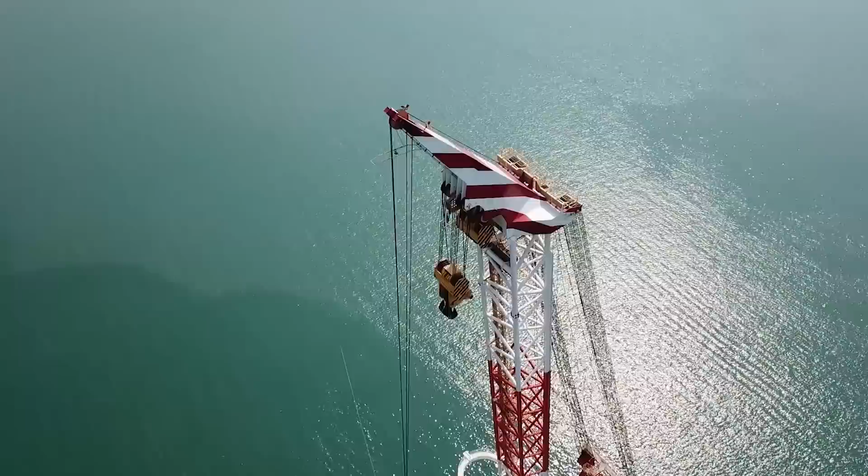One of the jewels in the crown of Gusto MSC is this mini crane built to be mounted on the leg of the rig to provide especially fine lift.

Named after a crab's claw for its crab-like grabbing motion, the Chela can reach below the cantilever and elevate toward the main deck, providing crane access to areas that were traditionally blocked by the drilling cantilever. By being able to work in this area, Chela has significantly reduced total well construction time.

And in the energy sector, time is money. This crane, with its multifunctional claw arm, is also special because it can easily be taken apart and remounted and retrofitted for different jobs.

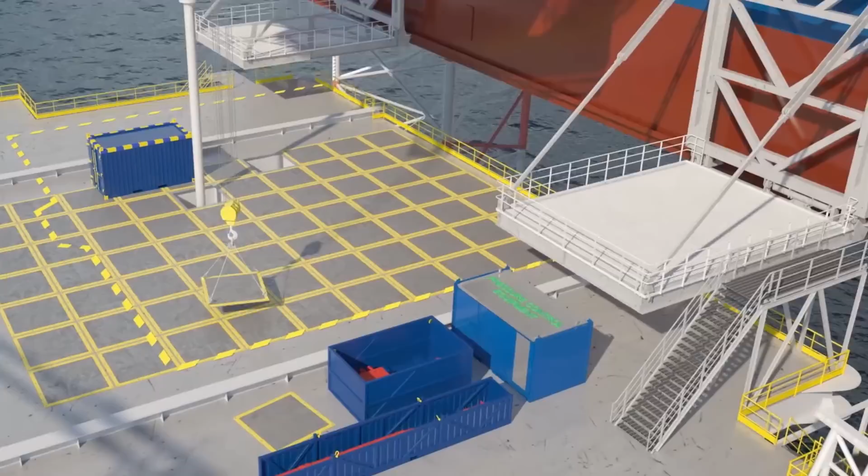It also is making repair work on platforms out at sea safer for workers by literally lending a hand in narrow, small spaces. By separating wireline operations from drill floor operations, Chela effectively reduces human interaction between the different crews doing different jobs.

We have also put a lot of effort into what we call the round-the-leg cranes. They are specifically developed for the jack-ups, because you have the 4 legs sticking out, and you want to have as much freedom with the crane as possible. So the logical thing is to put it around the leg, which had been done before, but nowhere near the capacity we were doing. That was really a first off that we did for our round-the-leg cranes around the late 2000s, with 800-ton capacity.

The wind blows constantly across the dunes of the Netherlands' northwest coastline. Just offshore, wind turbines are being laid to create some of the largest offshore wind farms in the world. The Dutch are world leaders in this sector, and Oleg Strashnov is poised to capitalize on this rapidly expanding new market. As demand for energy continues to surge, oil exploration will continue in the petroleum-rich North Sea, and dependence on renewable wind energy is also likely to expand, creating many new opportunities for these kinds of versatile marine cranes.

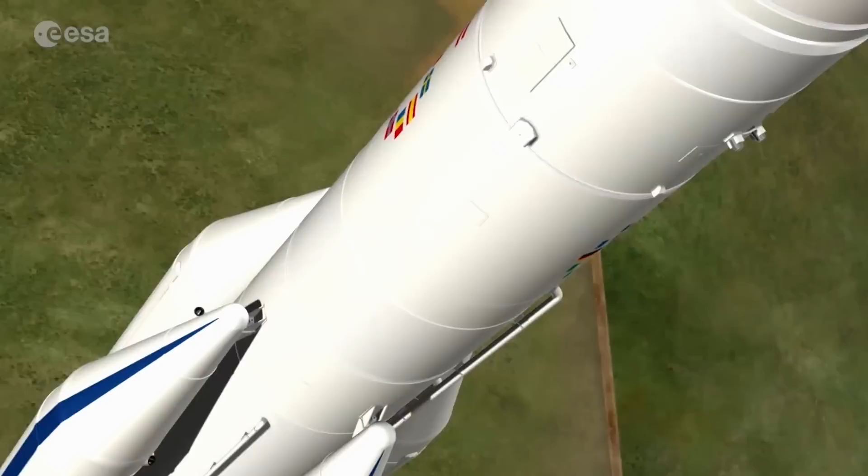This massive launch vehicle is built all over Europe, but assembled here in the cathedral at the Ariane Group construction site at Les Mureaux. It is a robust design that has resulted in 85 completed launch missions in the last quarter of a century. But in the next 2 years, it is due to be replaced by the more versatile and competitive Ariane 6.

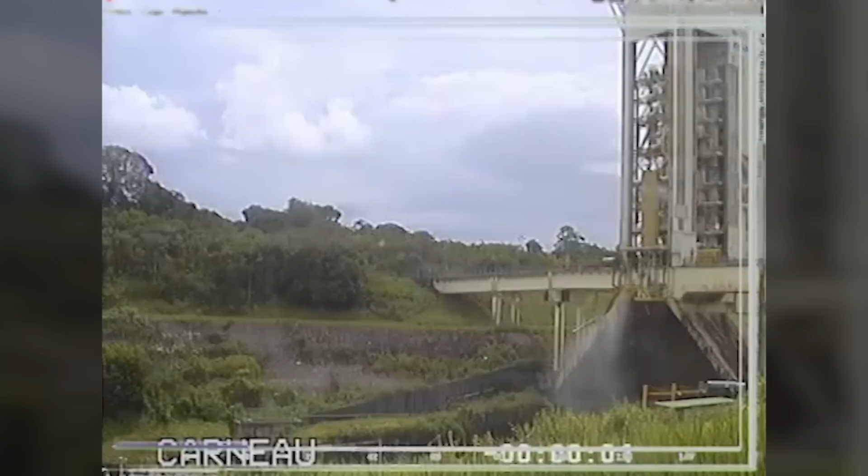The Ariane 5 launcher shoots into space, its rockets not only pushing its own weight in metal and fuel, but also a high-tech payload. The launch is the culmination of decades of development, experimentation and research in engineering and ballistics.

That's why rockets are dangerous, because by nature they are very explosive. The action-reaction principle, found by Newton in 1687, is: you expel something behind you fast, and the faster you expel it, and the heavier what you expel is, the more reaction you get.

The most exciting moment, and the reason why we have this profession, is the first time you launch a new launcher, or the first time you launch a launcher on which you had a key role in the design, or in my case, this was in changing the flight software, rebuilding the flight software of a launcher.

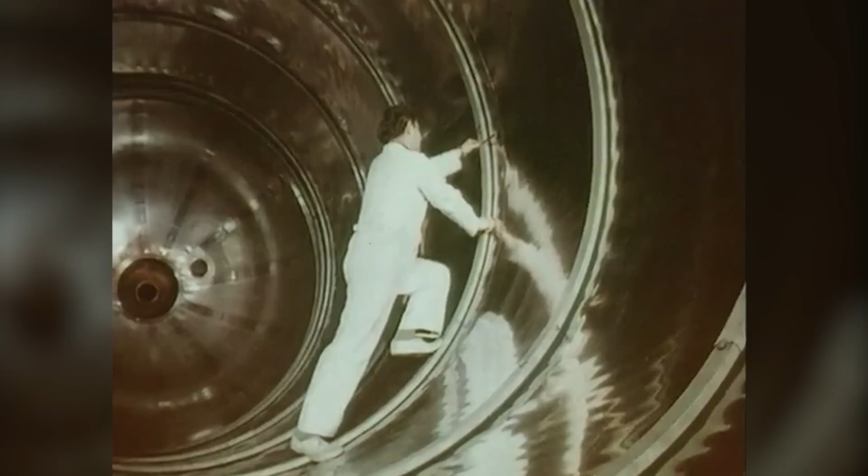The Ariane rockets were developed in France, but draw on almost a century of experimentation and research worldwide. Europe's rocket scientists began with simple, unreliable machines. One of the founding fathers of modern rocketry, the Russian Konstantin Tsiolkovsky, discovered the propellant power of liquid hydrogen and oxygen.

In 1914, the American Robert Goddard proposed multi-staged rockets, solid fuels, and the use of the Laval nozzle, narrowing at the waist to accelerate hot gases to supersonic speeds. In Germany in the 1920s, Hermann Oberth studied rocketry and proposed that rockets could be used to explore interplanetary space. But when the Second World War broke out in 1939, all Germany's rocket science was put to building wonder weapons.

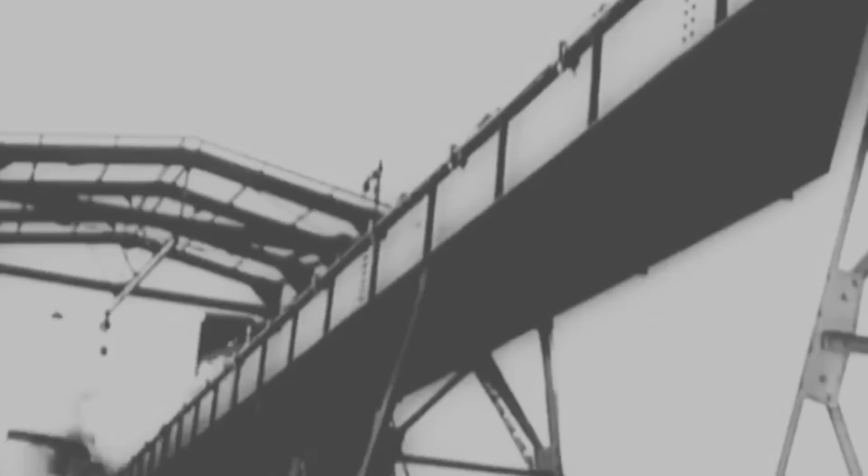Wernher von Braun led the rocket program based on the Pomeranian shoreline at Peenemünde. It did not change the course of the war, but it opened a new chapter in space exploration when Wernher von Braun moved to the United States under Operation Paperclip, while other top German scientists were taken to Russia.

Wherever they were made, rockets were, at first, powered by extremely volatile propellants. One of the world's foremost aerospace journalists is Bernard Chabbert from France.

In a rocket fuel, you have two components: the propellant and the oxidizer. The propellant can be kerosene, just like on the first stage of Apollo, for instance, and the oxidizer is something which helps it burn. Chemically, when you have this mix between a very raw propellant plus a violent oxidizer, the more violent it is, the more powerful it becomes.

Engineers have learned from the many mistakes of the last century to produce the reliable, fine-tuned rocket engines of today.

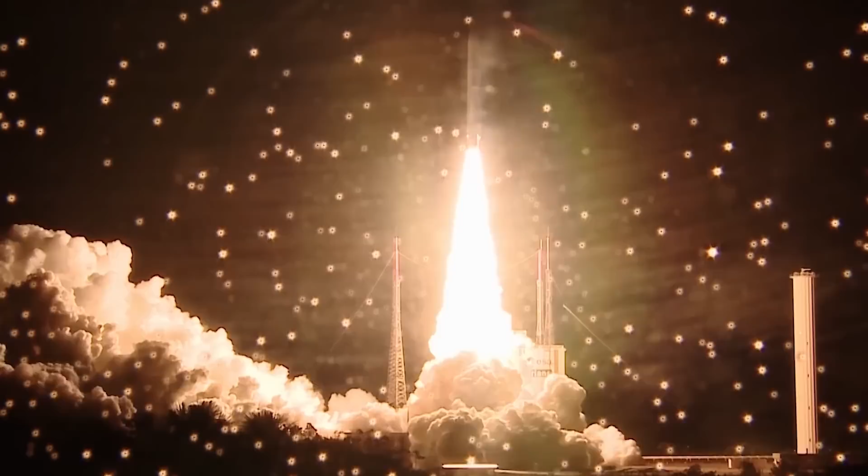Mechanically speaking, it's a nightmare. You bring the components into a combustion chamber where they have to be precisely mixed, more precisely than any cocktail in a bar. It's really pure chemistry. You're working at the extreme of metal capabilities, trying to break something and stop just before it breaks.

You have to gimbal the thrust, and this is done... it's just like cutting flowers. It's really something very precise, and it's almost a work of art in terms of guidance.

Russia's own rocket genius, Sergei Korolev, began the Soviet Union's rocket program, developing first the Sputnik satellite, launched into orbit by an R-7 rocket, and then the first manned spaceflight. By 1959, Russia had landed a vehicle on the moon and sent a satellite around it. Russia was winning the space race, and the United States had to respond.

The Russians built a staggering number of R-7 rockets, the Semyorka, thousands, because they used it for military purposes as an ICBM, and also to launch Gagarin. They launched the Sputnik with it, they launched Laika with it, and today Europeans are still launching Semyorkas from Kourou, because that rocket is so dependable, predictable, and easy to use that it remains in service more than half a century later.

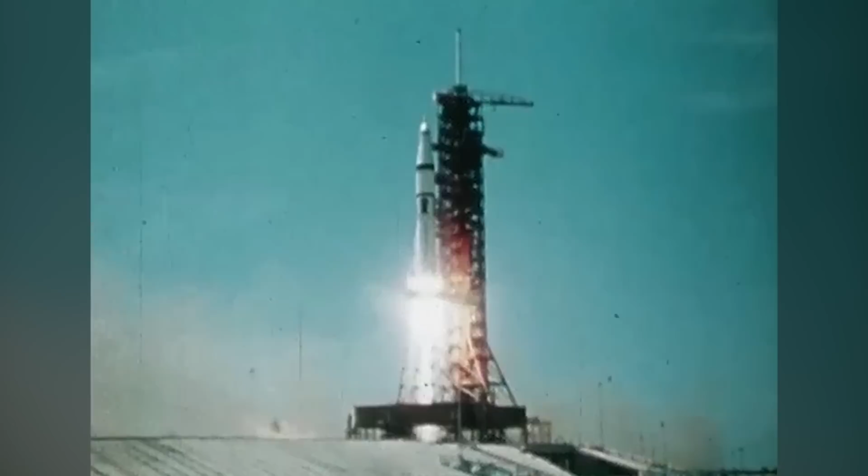Outside the Soviet Union, only the United States had the ability to launch satellites. European nations came together to attempt to launch their own rocket, but it was a disaster.

The British came with the Blue Streak missile, which was a strategic missile. The French came with Véronique, which was a small rocket that evolved into technologically comparable rockets. Everybody brought their own piece, and they stacked it together and called it Europa. They brought it to Australia, pushed the button, and the thing exploded into billions of little pieces.

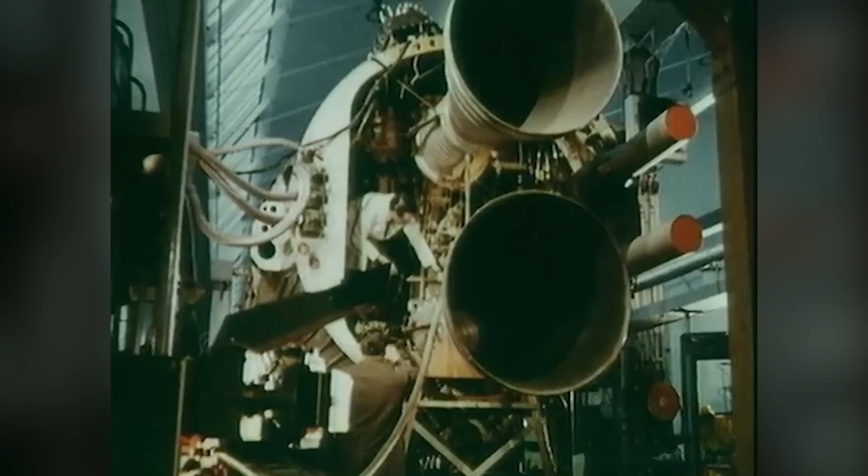The Americans, with their position regarding telecom satellites, created a kind of reaction in Europe, and more specifically in France. Some of the French said we need to be independent in terms of launching capacity. We need to develop our own system, despite the fact that we've just missed the thing with the Europa experience. And that's how they got together.

At the same time, they developed the idea of ESA. The European Space Agency brought together the founding nations to develop an independent space capacity. However, Ariane was still a long way away.

In the 1970s, NASA developed the Space Shuttle, a reusable launch system designed to radically bring down the cost of launching satellites. It was an engineering masterpiece. There was this old idea of an aircraft going so fast and so high that it would get into orbit, and it became the shuttle.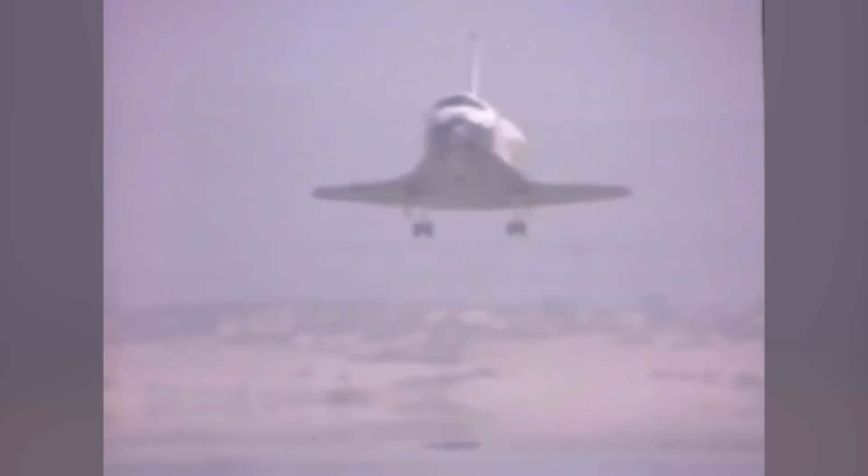I was there in Houston when they were launching the shuttle idea, and we had endless conferences about that, with people saying the shuttle would be a mix between the best of the rocket and the best of the aircraft. The end result was that the shuttle was a fabulous mix between the worst of the rocket and the worst of the aircraft. When they did the space shuttle, in their opinion, it was such a revolutionary machine that it should be able to fly every day, and for negligible cost—so cheap, just to use and so on.

And so they came and told us, stop your Ariane, it's useless, just come and work with us on the space shuttle. And we said, sorry, but we like our autonomy, and okay, our launcher may be conventional, but we think it has some future. It paved the way for the huge success of Ariane that we still have today.

The Europeans decided that there was a market. What does the market want? What does the market need? They found out that everybody in the world was waiting for the age of telecommunications to arrive. So they developed the first model of Ariane, and evolved it into new systems that were only beefed up versions of the basic philosophy, up to Ariane 4, which was probably the most extraordinary of them all in terms of delivery and cost per kilo to orbit.

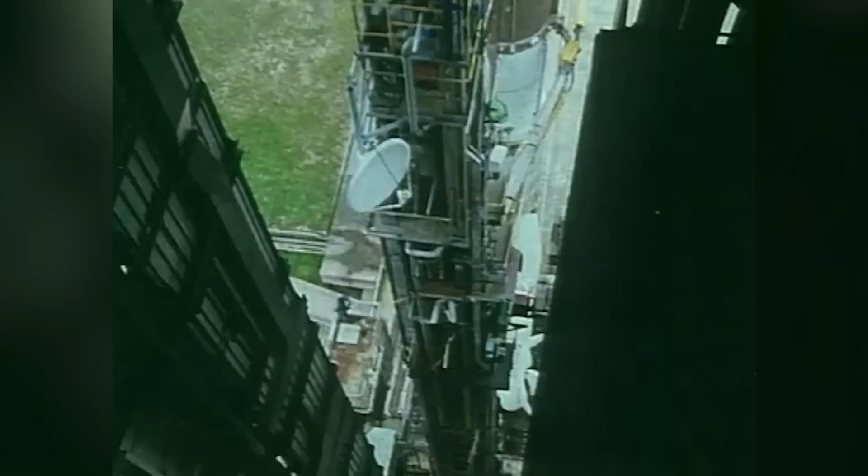Demand for the ability to launch satellites into space was literally skyrocketing. The Ariane family of launchers evolved throughout the 1980s, together with the telecommunications and observation satellite markets. By 1990, the Ariane 4 was well on its way to being the workhorse of commercial rocketry.

This is the so-called cathedral, where the Ariane launchers are assembled. It is here that the mystery of spaceflight becomes solid engineering.

Hervé Gilbert is the chief technical officer of the company that actually builds the rocket, Ariane Group. He is here to oversee an event that is rarely filmed: a central cryogenic stage being loaded into a container for transport to the launch pad at Kourou in French Guiana.

We are in our final assembly line in Europe. This is the building named Building 60 in Les Mureaux, where we assemble the main cryogenic stage of our Ariane 5 rocket. This stage, you can see it behind me. We are very lucky today because we are moving one stage from the building here towards Guyana, so it will be put horizontally in the coming minutes. This stage is shipped from here to Kourou, and there we finalize the assembly with the other stages that will join it and constitute the final launcher.

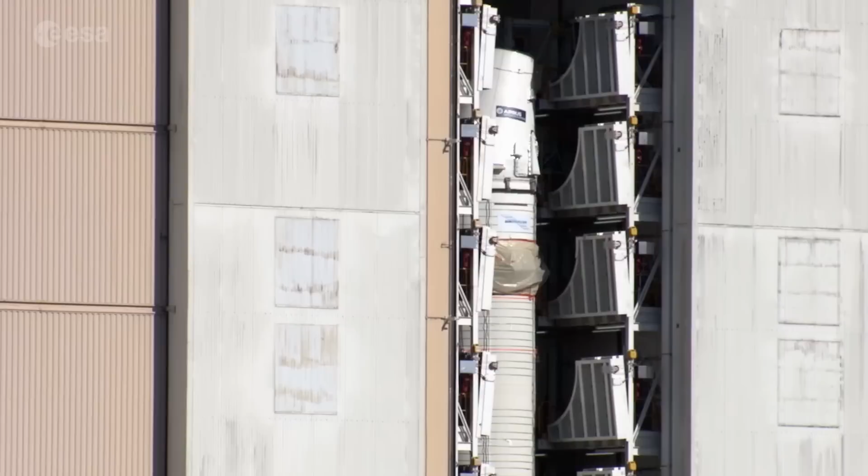Of all the parts of the Ariane 5 rocket, it is the lateral boosters that give it the power to get out of the Earth's gravity and through the lower parts of the atmosphere. They are called the EAP. The boosters are the most vital element of the rocket to get it onto the right trajectory to orbit. The choice of solid fuel gives it maximum power in the shortest space of time. The solid propellant's job is to push the rocket into the high atmosphere.

But despite its apparent robustness, the rocket is fragile. The rockets are programmed to provide just the right amount of thrust at the right time.

In the solid boosters, we're using the oxidizer and the fuel, mixed together in a solid form. For the oxidizer, we're using ammonium perchlorate, and we're using aluminum pulverant, in a very tiny powder, as the fuel, as the reducer. The reaction between the two of them generates very high temperature and very high pressure, which is used for the propulsion.

Engineers have discovered ways of providing exactly the right power at the right time by modeling the way the propellant is inserted into the booster. The very first thing that we ask of these boosters is to have a very high thrust, to get out of Kourou as fast as possible. So instead of just a pure cylindrical canal, we have a kind of star shape. We increase artificially the surface which is on fire, and so this gives us a higher mass flow, and so a higher thrust.

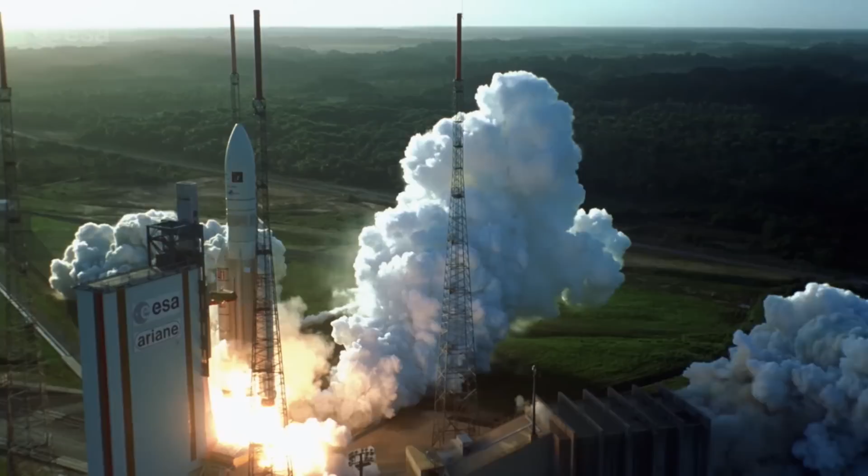The solid propellant in the lateral boosters is extremely fast-burning and volatile. It provides the power to get out of the atmosphere, but also makes up 90% of the rocket's weight. Once this star shape is completely burnt, then we have less surface, and so the thrust goes down. And that's very important because this is the most critical part of the flight, which we call the maximum dynamic pressure, the moment of the flight where the aerodynamic stresses on the launcher are at their maximum.

Then I burn my cylinder. So as I increase through time the size of the canal, I increase slightly the surface of the cylinder, so the thrust increases all the way until I have nothing left to burn. As the booster's propellant burns in contact with an ever-increasing surface, it produces more power.

Starting from the top, the star-shaped section of the propellant allows it to burn fast. But when this has been exhausted, the burn slows down until, as the fuel burns and the exposed surface increases, it begins producing more and more power, the final kick to get the rocket out of the atmosphere.

The two solid fuel boosters are attached to the main rocket via solid brackets that hold them in place to ensure the power is perfectly controlled. However, the main force applied to the main cryogenic stage is at the shoulders.

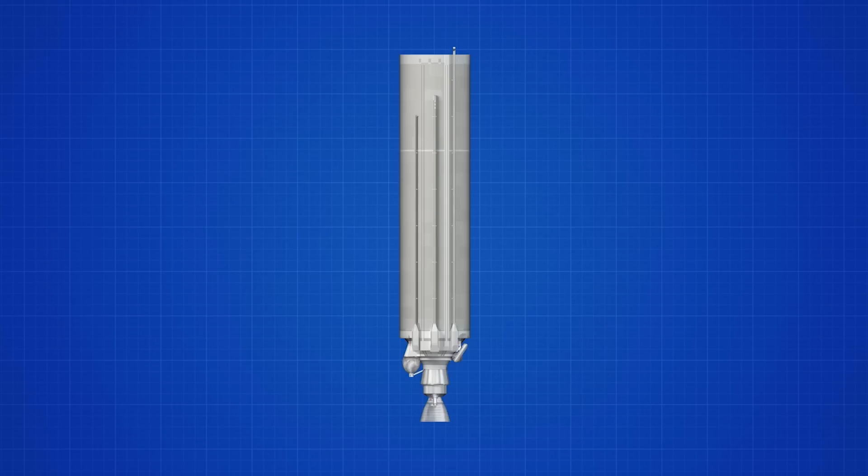So you have 1 turbopump for hydrogen, 1 turbopump for oxygen. And from the outlet of those, you inject into the combustion chamber. The propellants are composed of a highly combustible element, in this case hydrogen, and an oxidizer that causes the combustion, oxygen.

In order to store them in liquid form, the gases need to be frozen to below -200 degrees centigrade. The two liquid gases, however, will not mix by themselves. They need to be pushed together through pipes and injected into the combustion chamber at exactly the right speed. This is the job of the turbopumps.

However, the turbopumps are actioned using some of the energy produced by the combustion. So to get them working, liquid helium is pumped from spherical tanks into the main fuel tanks to push the oxygen and hydrogen through the turbopumps into the combustion chamber to ignite. Calibrating the pressures is extremely complex.

Bringing all the pieces together to build an Ariane 5 is a remarkably complex operation. The main stage is completed here in Les Mureaux, but the Vulcain engine is built in Vernon in Normandy, while the boosters are made in Bordeaux, and the third stage in Bremen, Germany. The turbopumps for the engines are made in Italy.

Bringing all this material together and making sure they all fit is a complex operation and requires months of checks and tests. Parts are coming from Germany, MT Aerospace in Augsburg, for the upper skirt. Parts are coming from Les Mureaux here. The company just beside me here is delivering the tanks together. Then below the tank we have a thrust frame coming from the Netherlands, and then the engine, the Vulcain 2, coming from Vernon in France.

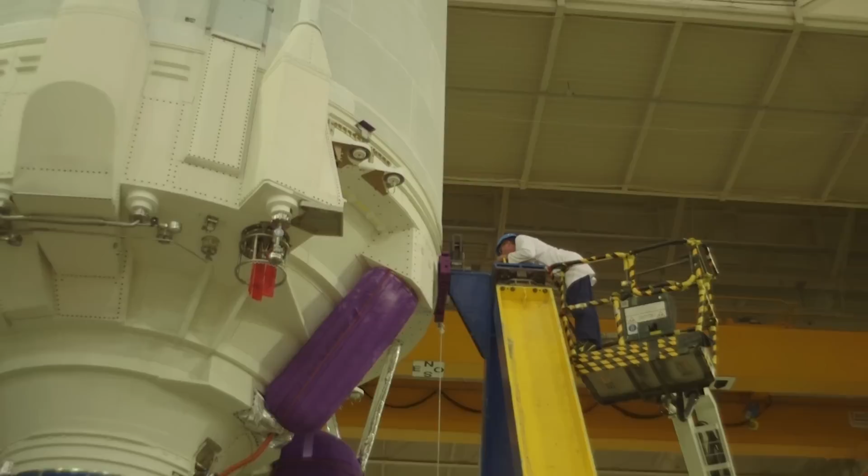Most of the time we take in this final assembly line is with checks of tightness, electric continuity, electric isolation, and so on. This takes 9 months, whereas the mechanical assembly is a matter of maybe 1 week, not more.

We use our third stage, which is here, also a cryotechnic stage. Hydrogen and liquid oxygen - we have 15 tons of them - propelled with an engine called the HM7B, which guarantees operation for roughly 20 minutes and gets all the way to orbit. Once it reaches the proper orbit, it is automatically cut.

While the main parts are made in France and Germany, with the payload fairing coming from Switzerland, the final rocket is assembled on the launch site at Kourou in French Guiana, where the solid fuel is mixed and molded for insertion into the boosters, and, as a very last stage, the cryogenic liquid fuels are loaded into the central and second stages.

Kourou, French Guiana, is a tropical paradise. But most people come here not for the beaches, but because of its latitude. This is an ideal place, close to the equator, to launch a payload into geosynchronous orbit.

Here, vital activities complete the production process of the Ariane 5 rocket. This is where the boosters are filled with solid fuel, and where the liquid gases - hydrogen, oxygen, and helium - are loaded into the tanks. The ground infrastructures are massive, and the launch pad is designed to survive the huge thrust provided by the rockets and the cryogenic engines. This is where the weather is monitored, the winds especially, that can cause a mission to be delayed or even aborted. This is where the control room follows every second of pre-flight activity, and where the computers that control the flight are located. It is a massive infrastructure owned and run by the French space agency CNES.

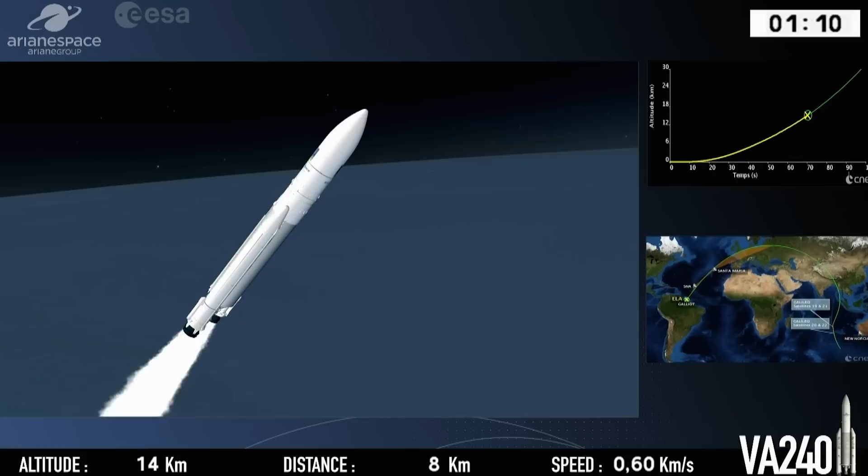At any point in time during the trajectory, the onboard computer is evaluating the current position and the trajectory that should be followed. This is guidance. Navigation is providing the instantaneous location. The most fascinating part probably is the control of it. By steering the orientation of the nozzles, steering the orientation of thrust, and getting the counter reaction of the body which accelerates, we take care to put it on the trajectory determined by the guidance, knowing that by nature such a launcher is fundamentally unstable.

There are different kinds of orbit, and since Ariane is able to carry two satellites, a dual payload, the final stage with the payload fairing is sometimes required to move from one orbit to the next. On Ariane 5 we launch typically two satellites, one big one in the range of 6 tons in the upper position on the launcher. Then there's an intermediate structure that looks like a bell. The upper one is put on the bell, and there's a smaller one, 3 and a half tons, in the lower position under the bell.

This is the performance of Ariane 5, 10 tons roughly for the geosynchronous transfer orbit. Ariane 6 will be a little better, by 1 ton typically, allocated to both the smaller one and the bigger one. Today the average size of a geo satellite is 5 tons at launch, so for two of them we need 10 tons, and this dictated the performance of Ariane 5. We set a world record very recently with 6.3 tons on one satellite, and we have some satellites up to 8 tons.

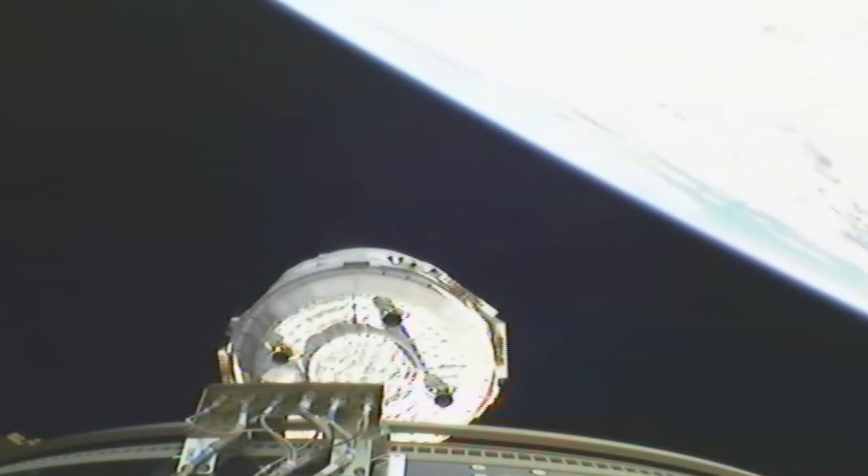This is the most delicate phase of the mission. It is the moment when the value of an object launched into space comes into its own. The make or break moment of the launch comes when the final stage pushes the payload into its final orbit. The last stage, which holds the payload fairing, is powered by a highly flammable and toxic fuel called MMH hydrazine.

Where we very often aim is what we call low Earth orbit, roughly up to 2,000 kilometers altitude. This is very used for all the observation missions, one of the key markets, for environment, meteorology, and so on. Then if we move on, we have roughly 20,000 kilometers from Earth, where we have the GPS satellites, the Galileo, and their equivalent.

The most useful orbit is GEO, Geostationary Earth Orbit. Geostationary means it's an orbit where a satellite, once placed there, is always seen as fixed from any observer on the ground. That's two-thirds of the commercial market today.

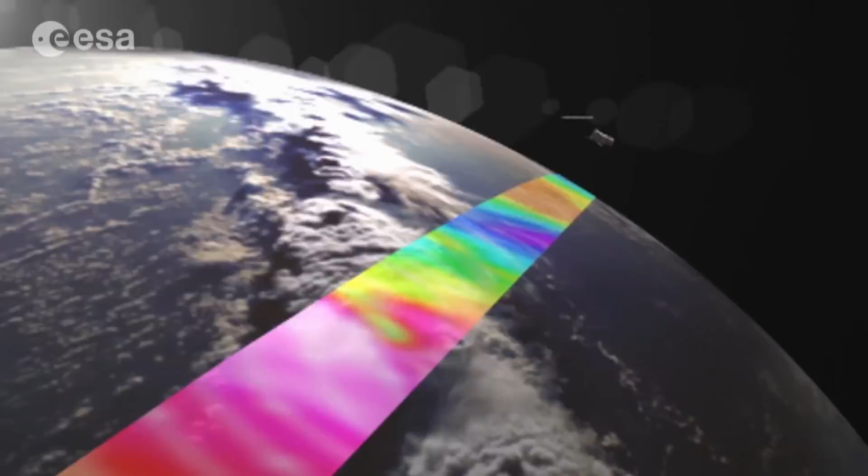Apart from launching thermonuclear weapons, the only goal of rocket building is to launch satellites and modules for the International Space Station. Communications satellites may cost millions to make, but over a service life of decades, and with the spread of radio telephony, they will pay for themselves many times over. In proportion, the cost of launching is minimal, and that cost is further reduced by economies of scale. Ariane Group's future depends on the evolution of the satellite industry.

While Ariane 5 was initially developed by the European Space Agency under the technical leadership of the French Space Agency, CNES, the next European rocket is being developed directly by the constructor, Ariane Group. There was a decision made by the European member states, the European governments, four years ago, by which we decided to group under one single umbrella, one single industrialist, the role of lead system integrator in production—meaning the architect of the launcher during development and design—and the engine manufacturers. So teams from Airbus for the first part and from Safran Group were put together in one single company, which is our company now, Ariane Group, and the decision was made that this company should be the prime contractor and the architect of the launcher.

Competition in the marketplace has picked up with the arrival of private constructors. The first launch of the Falcon Heavy in February 2018 seemed to be a turning point in Elon Musk's ability to deliver heavy satellites into space.

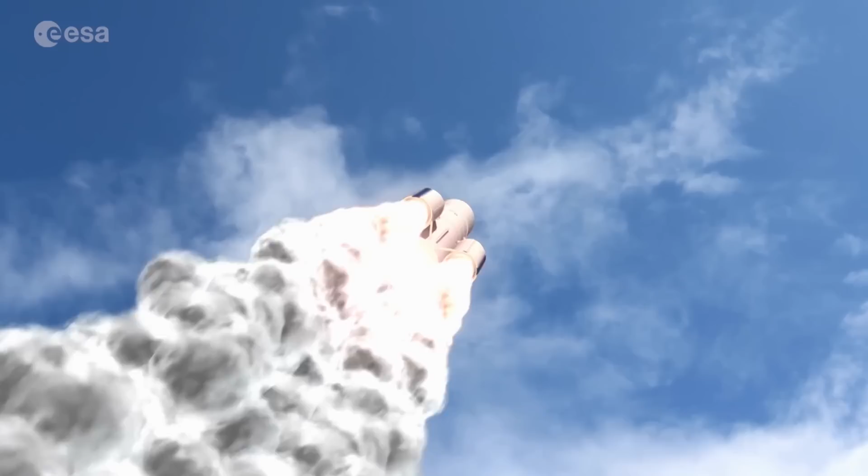Ariane Group has chosen a different path for the time being. We have changed some little but big things on Ariane 6 with respect to Ariane 5.

The boosters are smaller on Ariane 6 than on Ariane 5, with 147 tons of propellant per booster. There are 2 big boosters for Ariane 5, and 2 or 4 smaller boosters for Ariane 6, giving modularity and the opportunity to launch small payloads to low Earth orbits, or bigger payloads, even slightly bigger than Ariane 5 today, when using 4 boosters for high altitude orbits. Being able to modulate the weight and power of the launcher means Ariane 6 will offer a more flexible launch service.

Many smaller satellites or fewer large satellites, 2 lateral boosters or 4. And above all, the final stage can be restarted to position satellites in different orbits.

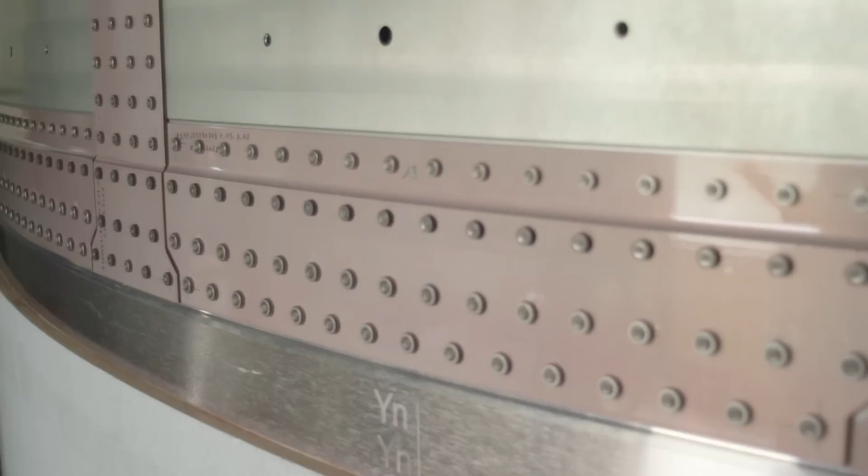The cryogenic engine will be improved, although the basic structure will remain the same. Construction of the rocket will be more streamlined too, and the thousands of rivets holding together the cylindrical segments of the rocket will be replaced by a new form of welding.

Another example is the way we weld the panels that constitute the tanks. We had quite an old technique used on Ariane 5, because Ariane 5 was designed in the 90s, even a little before. So all the welding techniques are now replaced by a safer, more secure one, called friction stir welding, which works by melting the two parts you want to join. You melt the interface between them, and then they naturally stick to each other without any defect or discontinuity in the material. Friction stir welding uses friction to melt two surfaces together, and as they melt, they are pushed together to form a single surface.

It is another new manufacturing technique that increases robustness and lowers cost.

What we have been preparing on Ariane 6 is new ways of manufacturing. Additive manufacturing really pays off for propulsion parts, parts of turbopumps, and parts of gas generators on board the engines, building these parts via additive manufacturing, which is 3D printing. By doing that we save a lot of time, months in the production of these parts, a lot of energy and power supply. There are lots of savings here, but we keep the same material as before. We just manufacture the part in a totally different manner.

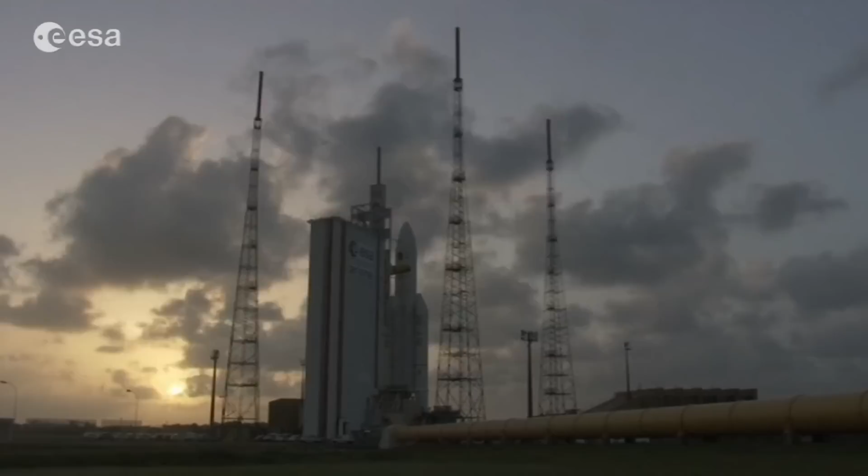The sun sets over Kourou, French Guiana. This equatorial country, still under French authority, offers the perfect place of launch for heavy loads into space. Hundreds of space engineers and technicians work here to make this international effort successful.

Another Ariane 5 is ready for launch. Another space adventure about to begin. 4, 3, 2, 1, top.